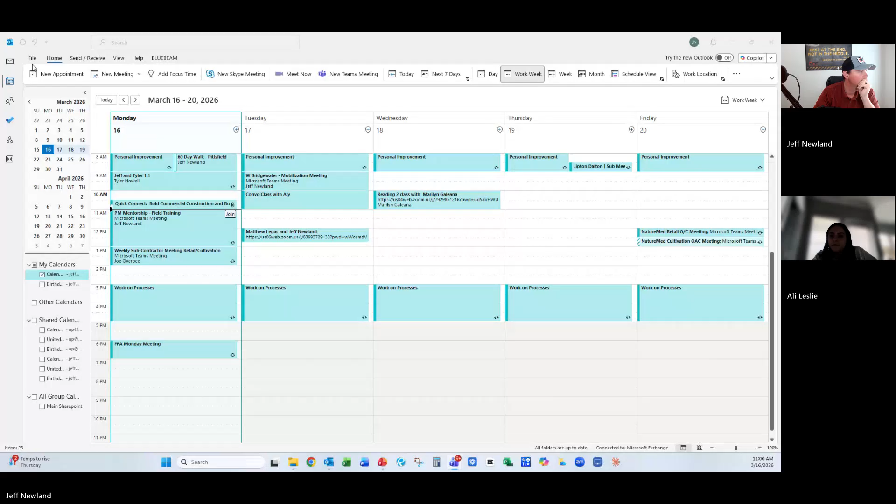Very chill. I'm starting to pack, so trying to take it one thing at a time. I got my first box done yesterday and I was like, okay, here we go. Beautiful. That's exciting. Yeah, I'm excited. Very cool. Very, very cool. Okay, cool.

Well, let's hop right into it. So we're going to build on our earthwork and utility, the civil foundation that we built last week and the week before. We're going to be talking about foundations, which is Division 3 for the CSI codes. We're going to talk about footings, slabs, rebar, anchor bolts, forms, and then testing, budget, all that kind of good stuff.

So, footings, slabs, and rebar cover. Anytime you talk about something being covered, as a definition, if you have 3 inches of cover, that means you've got 3 inches of whatever that is, in most cases concrete, from the outside of it to whatever's on the inside. For instance, think about a rebar cage that's set down in the hole. If the edge of that rebar is 3 inches to the edge of the concrete, then that's called 3 inches of cover, basically.

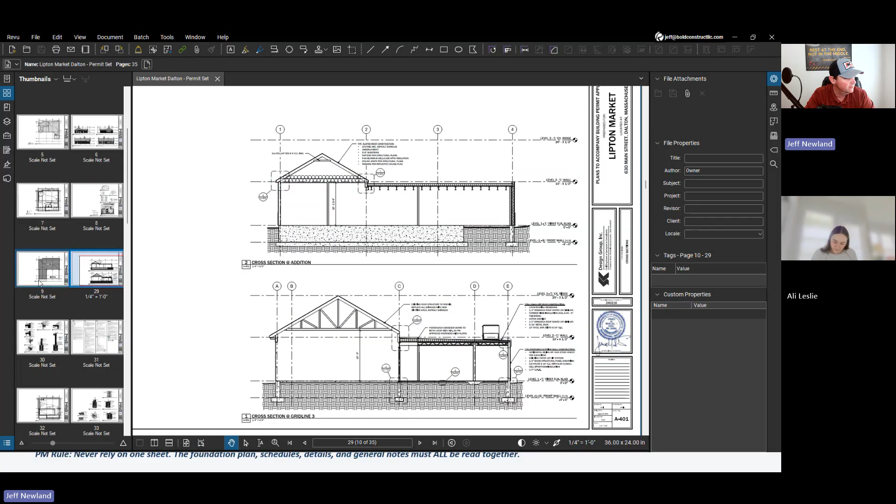So this is a plan view of your foundation. And you can see that it's got several notes called out here. They don't really call out the actual footings like they do on some jobs. These aren't actual, quote unquote, footings per se. This would be a footing right here. But we need to look at the section view to see, so let's just look at that real quick. 402.

Yeah, so actually here is your footing down here. You can see that it's called out as 10 inches and they've got it at -4 foot because that's going to be frost. So this is the bottom of frost wall. You're only going to see this nomenclature in some place that it's cold. You're never going to see this in Texas. Typically, it's never going to say frost wall.

But essentially the contractor could either pour this all at once, which would be called monolithically. So if he poured all of the foundation wall and the footing at the same time, that would be a monolithic pour. If he chose to do it separate, that's fine. You would just have a cold joint.

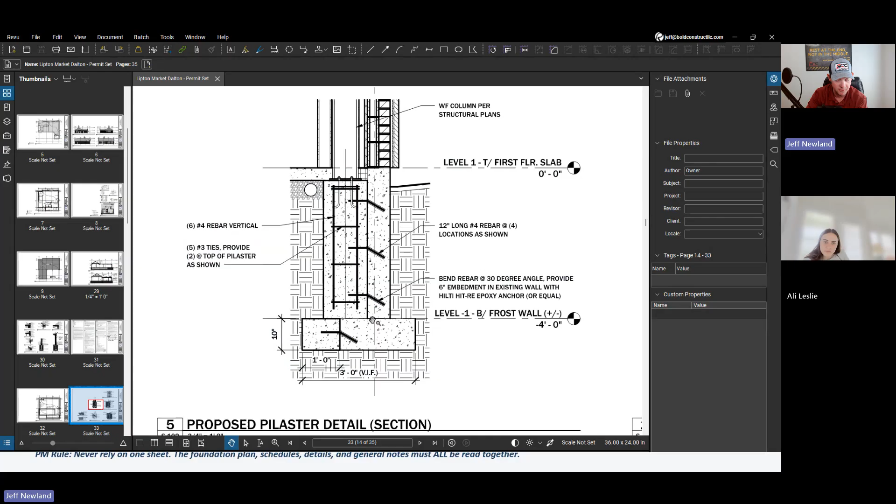So any place that you hear the word cold joint, that means that's two materials that are coming together. In this case, it's concrete and concrete, but the only thing that's joining them together would be, which I don't see it here, but there should be some rebar that would be stuck up.

Now, there will be instructions on some drawings that tell you whether or not you can pour it monolithically, depending on the engineering. Sometimes they don't want it poured together. Other times they do, because their calculations have taken that into account. So that would be a note on the drawings. If you don't see a note, then it's means and methods. It's however the contractor wants to do it.

So I want to find detail 1 on S102. So I'm looking for it to say S-102 right there. There's 2 on S102. There's 4. There's 1. All right. I'm going to say that we've got a typo.

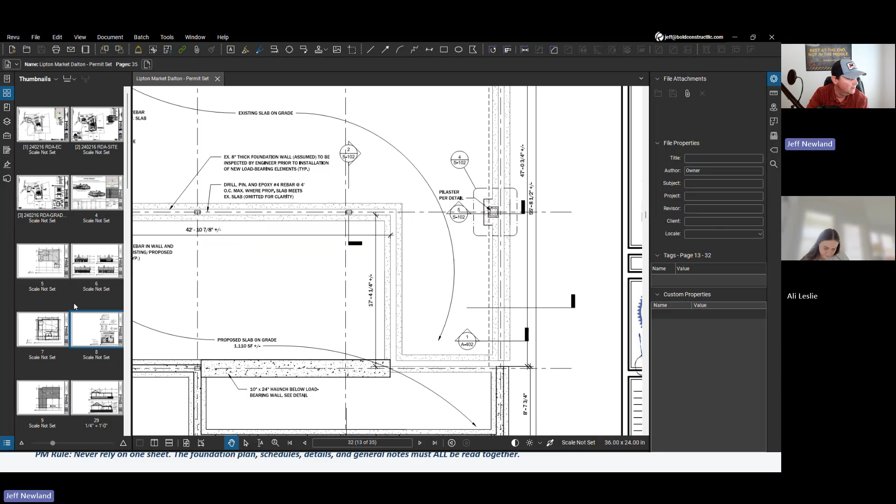And here's why I'm going to say that. So let's look at A402 real quick. And I could be wrong, I'm probably wrong in this case. There's 1 and 2, which could definitely be the detail that they're referring to. But the problem is, they don't give you any details for the foundation.

So let's go back here. Let's look at 2 on S102. So 2 on S102 would be right here. So that is a typical steel column on exterior wall detail. That's what they're trying to tell you there.

So if we go back here, you can see that this cut is through. So this would be a section view. The arrow always tells you how you're looking at it. So you would be looking at it as if you were standing back here looking this direction. Imagine you're down in the hole, you're down in the trench, and you're looking at it from that direction. This is what you would see.

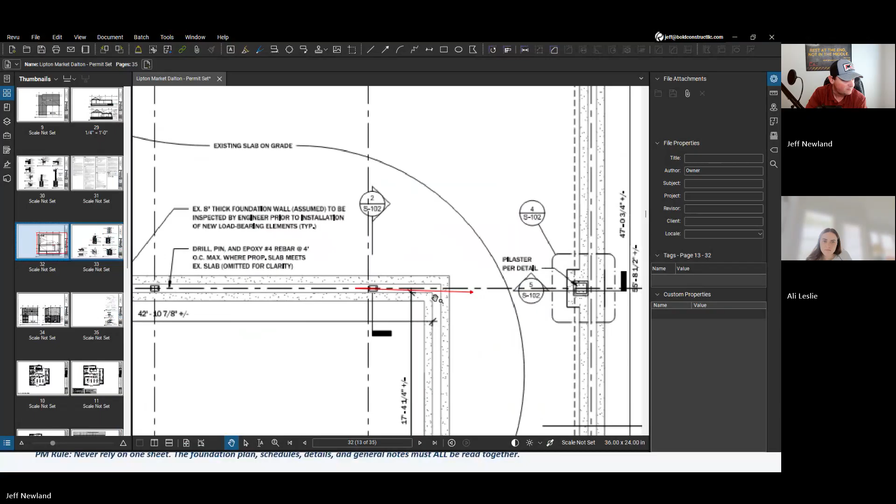So you would see the footing, and it shows to be an existing footing, assumed. Of course, they're assuming that this is actually there. So if we go back, that is actually going to be the exterior wall. This was the existing exterior wall. So if we go down to

see, so this is where we could ask RFIs, because I'm going to assume there's no call out here, but this looks like it's not on a column line. I don't see any columns here. So this is probably our standard detail. We can see the exterior of the building here. It shows the faux stone on the outside. So this is going to be an exterior wall.

So this section view should have a little number and should have an arrow, and I don't see it. Very typical error on the structural drawings. So we can do an RFI on that and verify that it is accurate, just to have it in writing, because we don't ever like to assume anything. But anyway, that's where that would be.

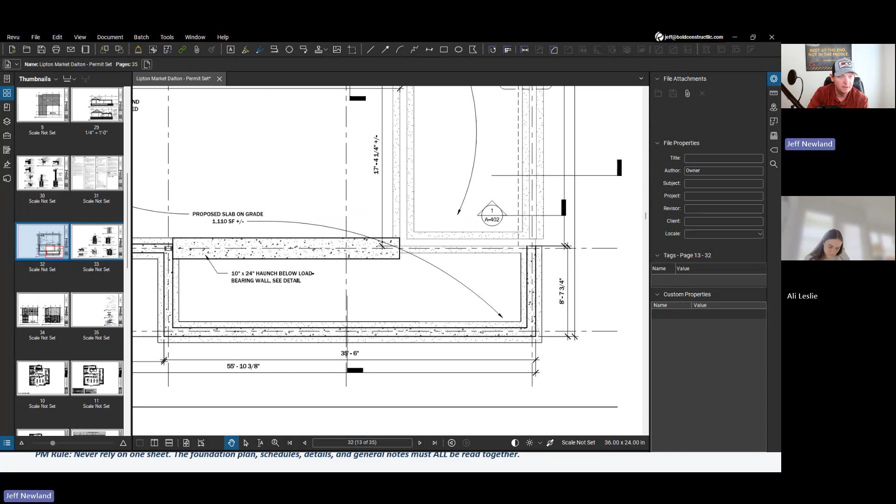So that should say 1 with a line and S-102. And that would tell you, okay, I need to look at page S102, detail 1. And that gives me the same section view. Okay. Let's see here. So footing schedule, pier column schedule, rebar reinforcing schedule. We'll hop into all that, and I'll show you details on what that looks like.

On this set of drawings for Dalton, we don't have any schedules that I can tell. Everything is basically called out, so it calls out number 4 rebar horizontal at 4-foot centers. So that rebar is going to be number 4, which, if you Google it, should be 1/2-inch rebar. One way that I think about it is, if it's number 5, you always put it over 8. They're done in eighths. So if it's called to be number 4, that's going to be 4/8, as far as the diameter of the rebar.

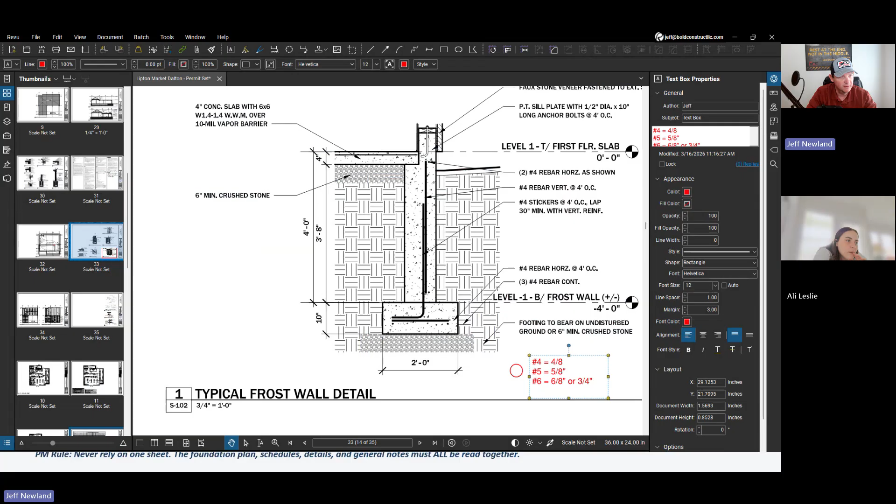Which would be 1/2-inch, right? 4/8. So if it's number 4, that equals 4/8. Then number 5 would equal 5/8. Number 6 would equal 6/8 or 3/4. And let me make sure I am thinking about that right. Yes, you are. Okay, good. And you can always Google it.

These are the standards. They always give you a weight. Rebar is sold by the weight. Not that you'll need to know that, but when it's sold in big quantities, it's sold by the weight, however much tonnage you have. But in any event, that gives you the nominal.

The reason that's important is that when you look at rebar shop drawings, you need to know what a number 5 is, because sometimes it'll be called out as number 5, and sometimes it'll be called out as 5/8. Just kind of depends.

But you would actually have it in the schedules that we're going to look at. Anytime you see the word schedule, it means table. And it's just a legend, right? It's a table that tells you what things are. And you would see in there that it would call out the actual rebar size that was supposed to be used in that particular footing.

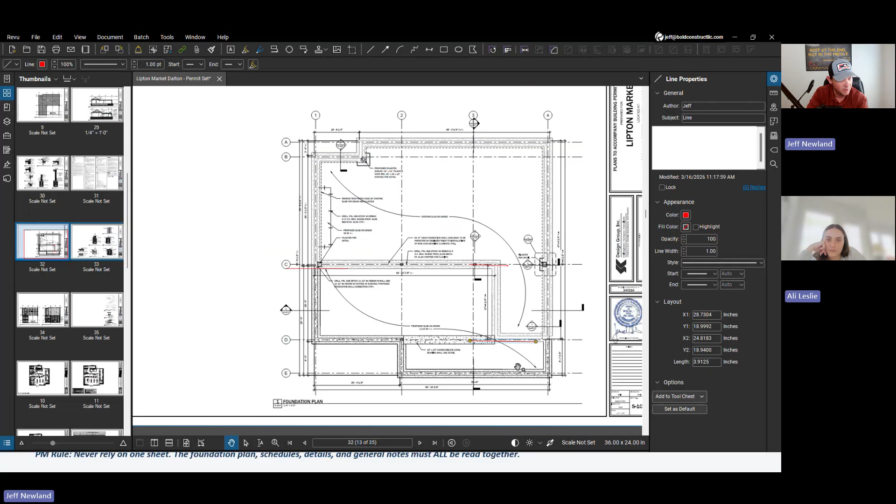Okay. Since this is a smaller build and we're not really doing that much of the foundation, because all of this is assumed to be existing, the only stuff we're adding is really from here back. So from basically this line, from right in there to right in here, is what we're adding. That's the only foundation we're adding. So they didn't go to the trouble of making any kind of schedule.

Okay. So when I was looking through the plans, there are schedules in these plans, but for architectural stuff, not for the foundation. Correct. So you'll have an equipment schedule. You'll probably have a finish schedule somewhere. Yeah, floor finish schedule. You should have a room finish schedule. All of those schedules, and typically they're all done the same. So it would call out whatever the floor finish is, whatever they're using.

So F1, F2, F3. That would be floor finish 1, floor finish 2, floor finish 3, and then actually what they are. But you should be able to look at any set of plans, go to the architecturals, look for a room finish schedule. It should tell you the room number, the description of the room. It should tell you how it's finished on one wall, how it's finished on the ceiling. That's why they call it a room finish schedule.

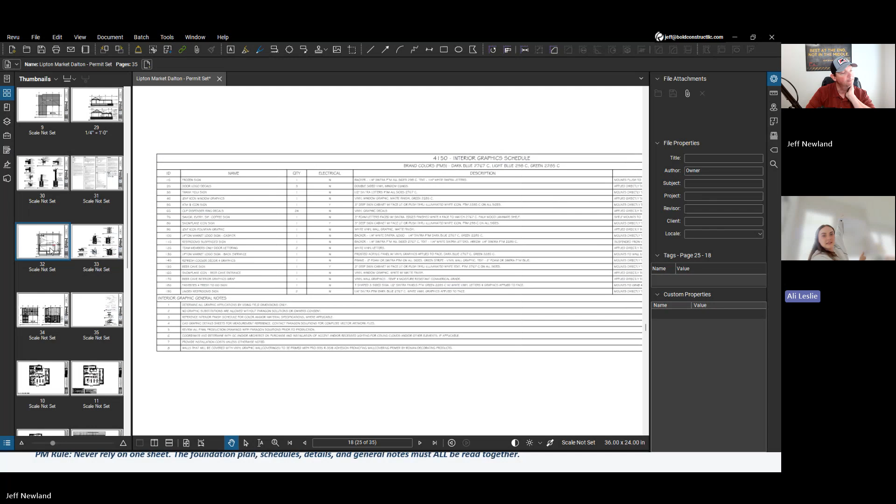Okay. And now this isn't technically in regards to foundation or concrete, but on the schedule for Lipton Market, there was a section on one of the schedules. It kept saying verify on a few line items, and so, not the graphics, but I think it was that one, is that when you would have a submittal? Yes. Okay. So all of these verifies on here are to be used. You're going to see the word verify a ton on any set of drawings. Basically, if the architects and engineers don't know, then it's on the contractor to verify.

Okay. So this is where we would get, which we have for this one, because I actually have sent all the equipment cut sheets. I put together a package, and we actually sent that, because we're not providing the equipment here. So I sent that to the electrician so that he would know what he's supposed to be running. So then he would look at it and say, okay, the freezing condenser, I've got a cut sheet for that. And so he would make notation of what the volts are, what the amperage is, and what the phase is.

Now that's important because when they go to pull wire, if they pull the wrong size wire, they're going to have to pull it again. And there may not be room in the conduit. That's why it's hyper important, super, super important. When we have a kitchen, when we have any equipment that the owner's providing, that we get those cut sheets and we make sure we get them to the electrician and have him verify. As the first verification, we have him verify, because he's the one that's actually doing the work, that the electrical drawings actually match the equipment that he's going to be putting in.

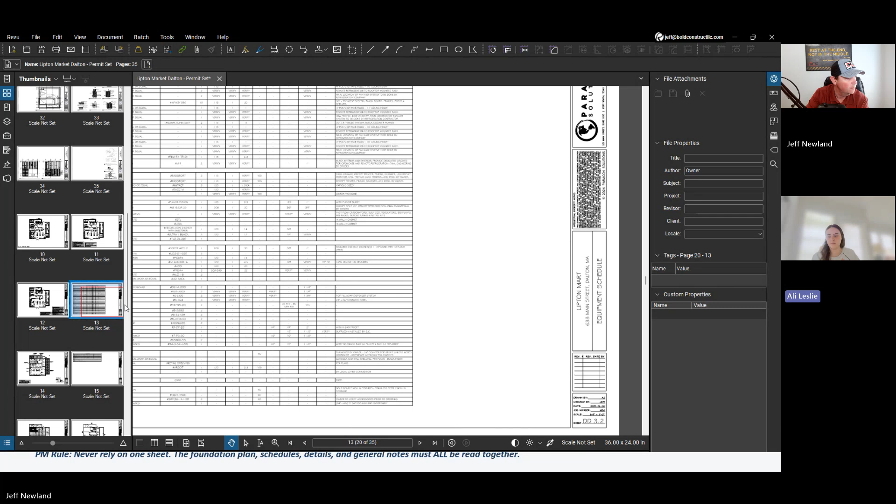Okay. I had gone through and highlighted all the verify ones, and I mean, there were a lot. And then I looked on the submittal tab in Procore, and there are some that are missing, which I can just send in an email, or we can talk about it another time. But anyways, when we had met about Lipton, you had said to look at the plans and see what I felt needed to be a submittal. So I just made notes of some things, but I wanted to make sure that a schedule is one of the places you would find items that would go into a submittal. Yes, that's correct. Yep. You're absolutely right.

And yeah, some of these we're not going to have. Obviously anything that doesn't require any kind of power, we're not going to have a cut sheet for. So any of these items we're not going to have, but we should have at least some of these, like the under counter sink, the faucets, the soap, because those are the ones that are being provided by the owner.

The ones you're not going to see on the schedule pertaining to plumbing are going to be like your restroom, your faucet, your sink in the restroom, because they're not doing that. So yeah, just something to keep in mind. But yes, it's very hit or miss. Every project's different. It just kind of depends, that's what makes our job so hard sometimes.

Okay, perfect. So we'll talk more about schedules. We'll get into those. I have some examples of that. Sections and cuts. We talked about sections, and how that needs to be looked at. If you've got a plan view, you should always have a section view that you're able to look at a cut on a wall, on a foundation, on whatever, because that provides almost all the detail that you need in order to build it.

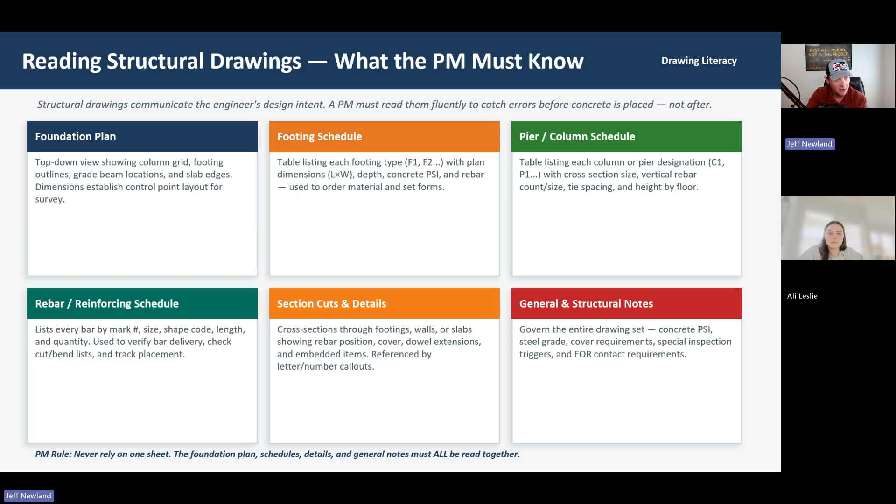So just keep that in mind. More and more on these smaller jobs, they're not calling out the PSI on the concrete. So we always assume that it's 3,000 or 3,500. There's not a whole lot of price difference in those, maybe $5 a yard, something like that. So not a huge deal. We just need to make sure that we get it right.

So you've got different types of footings. When you talk about a slab, that's not a foundation. Those are two different things, slab and foundation. So this is a great example here. Everything from the bottom of the slab down is your foundation, which is going to consist of your footing. It may consist of a foundation wall. It may consist of a pier. But just remember, anything below the slab is your foundation.

Anything from the bottom of the slab up is just your slab, which is going to have either wire mesh or rebar in that top, usually 4 to 6 inches. Okay. So this is all slab right here. Like I said, everything below that is going to be foundation, foundation, foundation.

And then they backfilled here. This is pretty common with what you would see in one of our car washes. We've got a foundation, we've got a foundation wall. They're going to backfill with either stone or gravel, and that way they'll be able to get it to the exact elevation that they need. And then the slab is your top 4 to 6 inches. So just for definition purposes, there is a difference between slab and foundation.

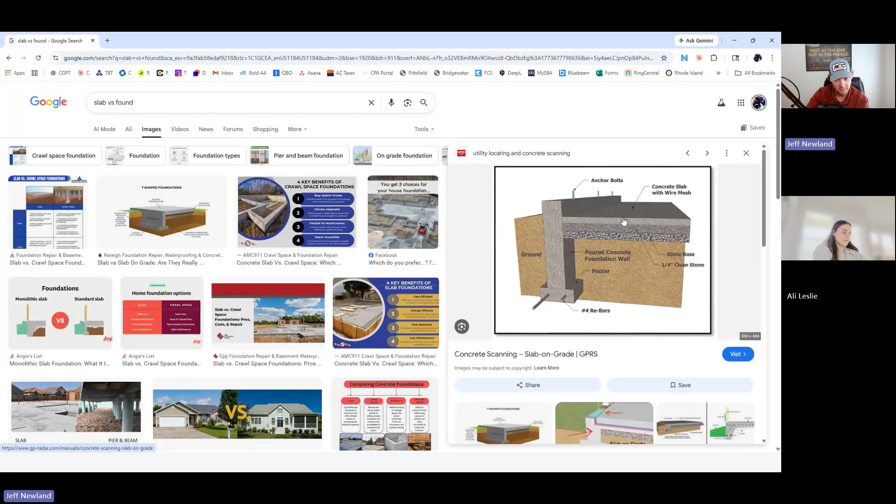Strip footing. Let me pull up a drawing, it'd be easier to see. So a strip footing is like another word for your foundation wall, as we relate it to the car washes. Basically, it's that wall that is in between. It's above the footing, but it's the smaller wall that is between the two footings.

This would be a foundation wall. Again, they don't really call them strip footings, and the reason they don't is because we don't want to confuse these footings here for your columns. So you've got column footings, foundation walls, and grade beams are the three that we talk about all the time.

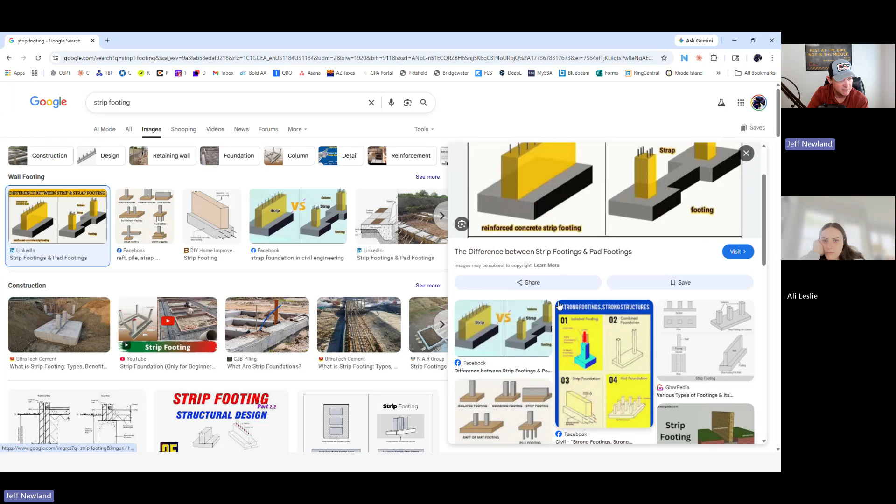So mat foundation we don't use on our projects. A mat foundation is basically a huge slab. I think one of the videos probably covered it, but they use it in high rises and taller, bigger buildings, where instead of having a bunch of different footings, they just pour one big footing over the whole thing. But like I said, we don't really get into those at all because our buildings aren't big enough.

Slab on grade is your slab. SOG is always slab on grade. They call it a slab, which is your finished floor. Whenever they talk about finished floor, your finished floor elevation would be the top of your slab, or your slab on grade. Again, it's the top 4 to 6 inches that's above your foundation, and it's always big and flat. So, okay.

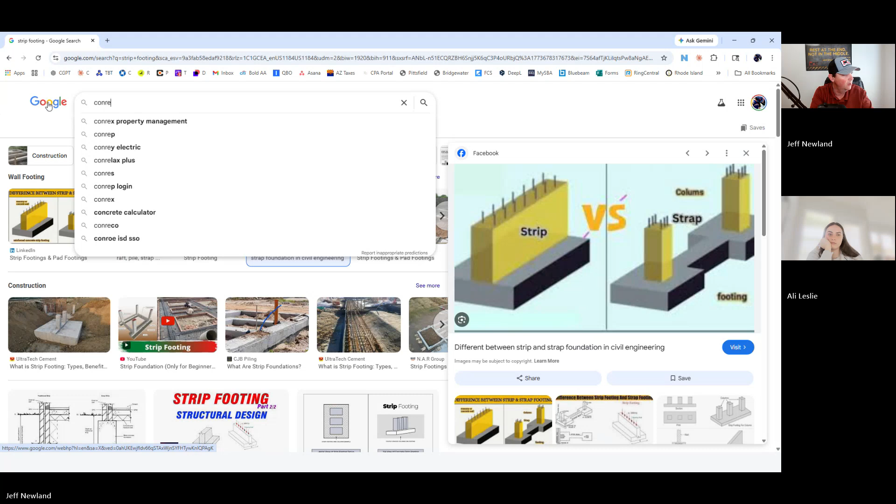This is talking about rebar cover. So this is what we talked about a while ago, and these are general guidelines, right? Everything could be different, but you should always have at least a minimum of 3 inches of cover between your rebar and the ground. This particular one is talking about chairs. Let's look. It's not a very good picture. No, we don't use those. There we go. The ones that you're going to see a lot are going to be the plastic ones. So when they talk about 3 inches of cover, it's 3 inches from the ground to that rebar, where the chair is.

This is a very common one right here. And then you will also see these, and all of these do the same thing. They're not near as common, but you would also see what look like little bricks. There we go, this is a good one right here. You'll see that a lot as a rebar support. Basically, it does the same thing. All it's doing is keeping that rebar off the ground.

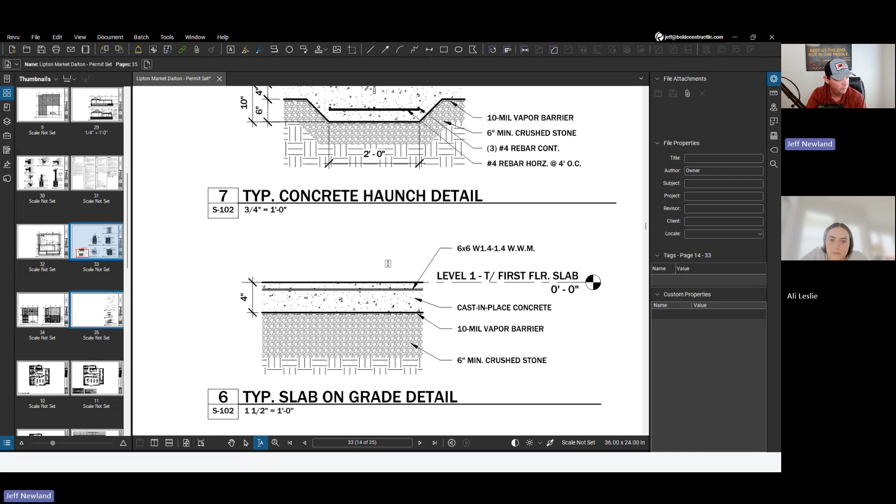And then you also want to make sure that, so every slab has a vapor barrier, and it means exactly that. This keeps moisture out of the slab. So it's a piece of plastic, right? And then of course they've got their 6-inch crushed stone. We're getting a little off subject, but it's important that we talk about the vapor barrier, because in your concrete submittals, you should have the wire and you should have the vapor barrier.

The 1.4, I ChatGPT'd it. It's the wire size in both directions. Oh, okay. Well, that makes sense. So it's not in inches. That's got to be in millimeters, I would think. I don't know what else it would be in.

So this is vapor barrier with rebar. Let's see if we can find a vapor barrier with welded wire, to see if we can find an exact example. That looks like welded wire. So this is what your slab should look like. That's exactly what they're doing. So the reason they have it elevated like this is because they're planning on putting a 3-inch chair underneath that. So that's why it's in the top third of the slab. But they're laying their vapor barrier down.

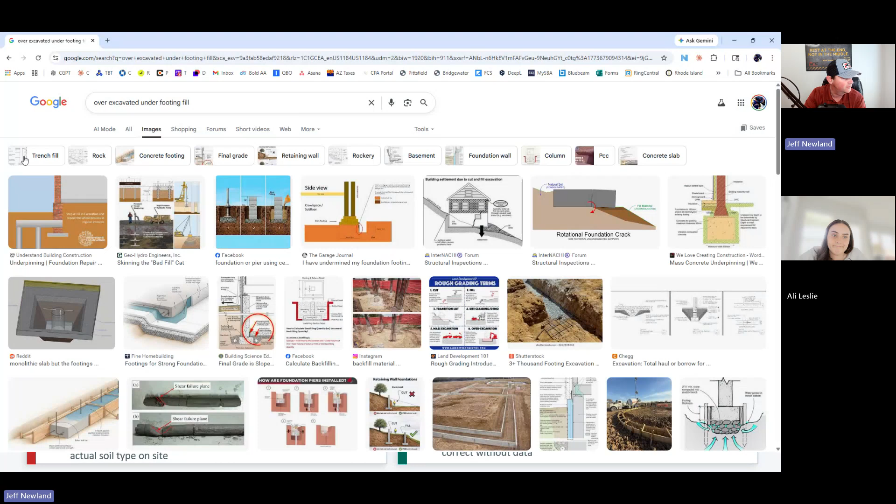So, okay. But what it's talking about, let me see if I can find a decent representation here of what it's talking about. So sometimes you'll have a... don't really see it. Some of these pictures are not exactly the highest of quality here. Basically what I'm looking for is where you've poured a foundation, you've poured a footing, and I guess we could use this for lack of a better term.

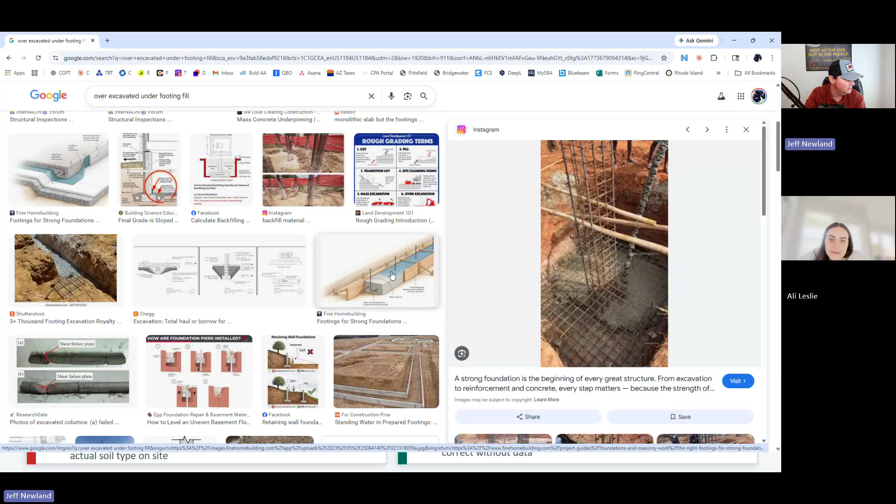So let's say that, in Texas, so you'll see this in the Northeast, they'll over excavate and they'll actually do their forms for their foundations. You won't hardly see this in Texas at all, ever. Unless the structural engineer has purposely called it out and says that all foundations shall be formed and not earth formed. That's typically a huge note if you're in Texas, because it's not the way things are normally done.

Think about it like concrete without the rock in it, without aggregate. It's like a foam material, except it's not foam. It's a different material, but that's why they call it flowable fill. It will go into the cracks, into the crevices, and will support this. Basically, it acts like the dirt that had washed out from underneath it.

So that is something that is 100% preventable. That's not something that sneaks up on us. If we need to backfill, we need to get it done at least to the top of the footing. That way it protects the earth that's on the bottom of the footing.

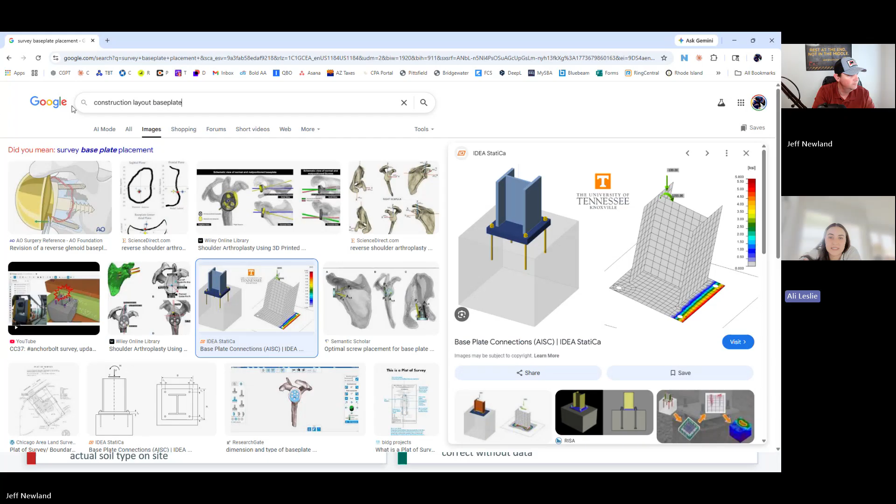And now, would this be something that the superintendent would do, or would you get a survey company to come out there? No, we always get a survey company unless, like in West Bridgewater, Nick has our total station. So he will actually take it and do what the surveyor would do. But essentially you're going around.

Now, not all of our base plates are going to be marked like this, but that gives you a good representation of what we're going to be shooting for. So they would go around and survey. They would put their machine right here, their grade rod right here, and survey to make sure it's in the right place. Okay. And some places require you to have a form survey. Actually, the municipalities will require that.

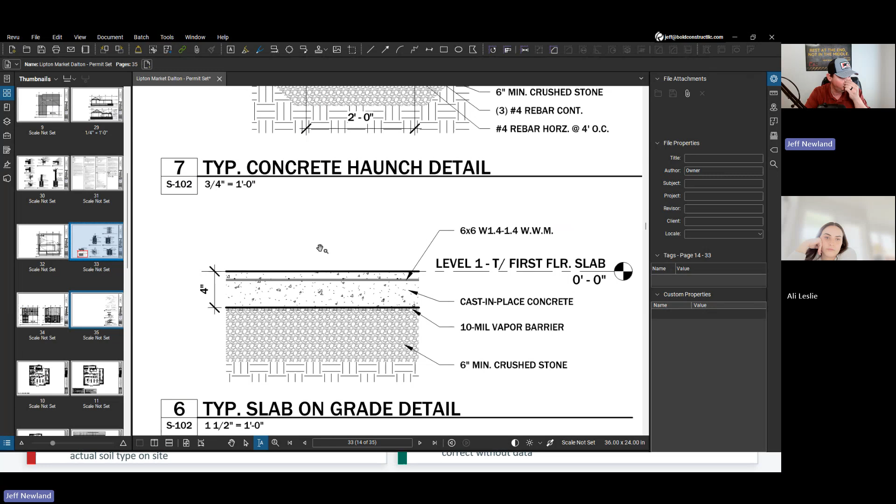So like on our car washes, they're going to take that column layout drawing that we got, and they're going to compare that to exactly what we have in the field. So if we go to our structural drawings real quick for West Bridgewater. Oh, well, hang on. We're making a mess here. Let's close this out. Don't save it.

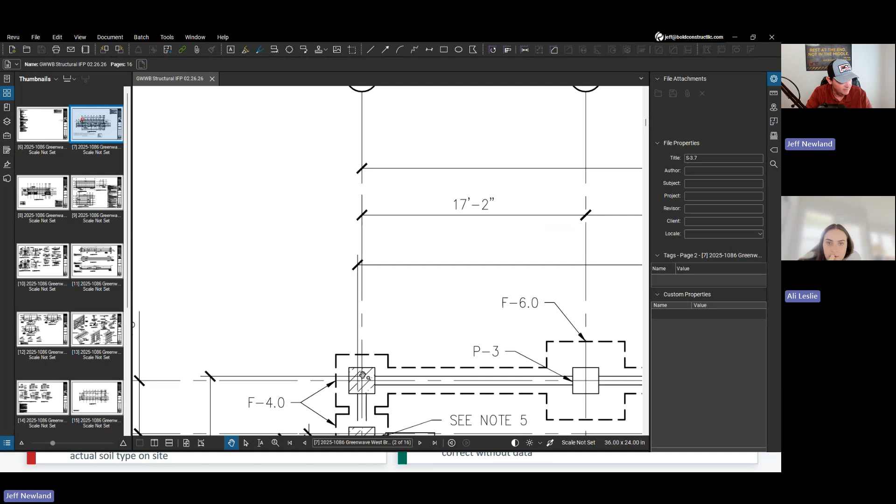But the thing you have to pay attention to very closely, and they have to pay attention to this in the field, because if somebody's not watching, they're going to look at this drawing. Think about this. Say you got 4 guys in a hole out there trying to form this with a bunch of paper drawings, right? And they're looking at this and they don't see that this is not lined up on the center of the column. We have done this before.

So that's why the base plate survey is so important, because the center of this base plate is right here. Well, that didn't help.

It's right there. Okay. But if they're looking at this in the field, they may look and say, okay, well, from center of base plate to center of base plate, I need to be 120 foot. So that's what they start laying out. Well, if you look, 120 foot takes you all the way to right here, not right here, which is the center of this base plate. See the difference?

Yeah. So all of a sudden now, if they lay that out wrong, then we've added, we'll just call this 4 inches. Maybe this is 4 inches here, and then over here is another 4 inches. So now all of a sudden our structure is not going to fit together. It's going to be 4 inches off in both directions.

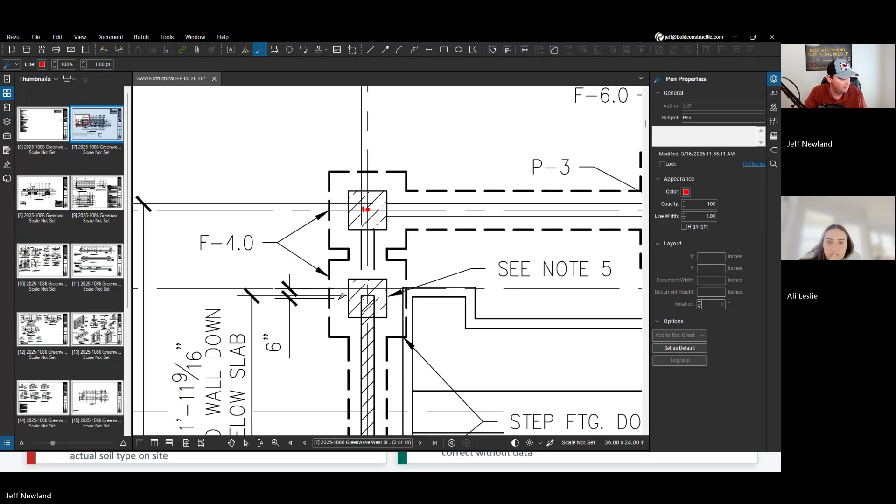So that's why, and here's another example of this. This column line doesn't line up with the center of this column. Now, isn't that confusing as hell, right? Yeah. So the center of this base plate is actually somewhere in this neighborhood. I actually couldn't really tell you where that is right now without CAD. So that's why it's so super critical to get it all surveyed before we pour.

Okay. The worst thing a superintendent can do is pull a James Gray and survey it after everything's poured. Oh, I didn't know he did that. He wasn't coming to mind, but I think it was our friend in Danville before the guy that ended up finishing it, Jonathan.

Yeah. I think maybe on meetings you had said, well, have the surveyors gone out? Have you kind of looked at it yourself? And he was like, oh no, I haven't, I'll do that today. Then the next week, have you actually done it? No, I haven't yet, I'll get it done. And so I just remember hearing how important it was, even if there's time before the surveyor can get there, at least making sure on your end. I think he had something on site that was useful and he was not using it.

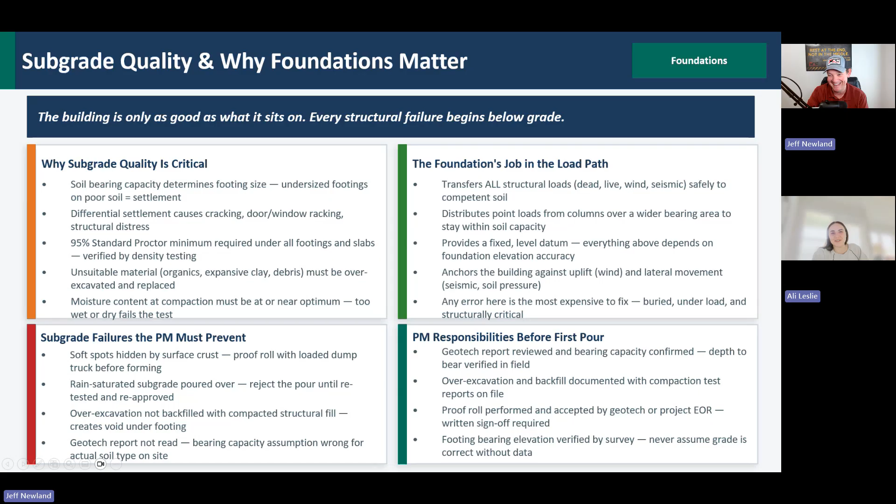For those of you listening, that's the quickest way to get fired from a job too, by the way. So yeah, we have lots of stories to tell. Oh goodness. All right.

Well, I know that my top elevation is also my finished floor. All right, my FFE. It's not FF&E, it's FFE, because FF&E is something completely different, dealing with architectural stuff. So finished floor elevation.

So I know that footing number one, F1, is 2 foot from the top. So if my finished floor should be 100, right? It's always 100. Your finished floor is always 100. Then I know that the top of this footing is going to be 98. Something super simple that the superintendent can verify.

This particular one also gives you the PSI, and then it gives you the rebar mats. So this is the different. So they want 4 number 5s at 9 inches on center. So that's going to be... let's go to rebar mat 4 number 5 at 9 inches on center.

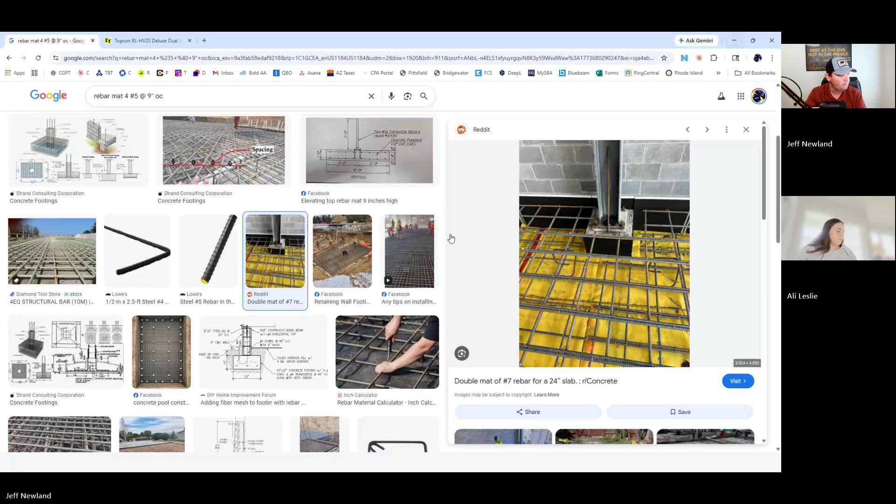So let's just say that these were single pieces of rebar. So it's number 5s, 1, 2, 3, 4, and then the opposite direction too. It would be 9 inches on center. So it makes a grid is all it does. That's all it's doing. And that would be the same thing as what it's telling you.

Let's see, this gives you a dowel. Let me look here. Number 6, number 4, a continued bond beam. This is actually for, here we go. 3 number 4 continuous, and number 4 transverse at 48 inches on center. So that's a fancy way of saying, think about that as like a rebar mat. I need to Google. I haven't heard the word transverse in quite some time. So number 3, and I think that just means the opposite direction is all that means. Again, sometimes they make it more complicated than what it really needs to be.

But you should have a footing schedule on most of your drawings. If we go back to this structural set, because these should be the most common of what we're looking at. And I've actually got an example that I put in here later. But here on the main foundation plan, you can see it's a much narrowed down version, doesn't give you a whole lot of information other than the footing number, the size of the footing, and the actual rebar. So this is number 5 bars at 6 inches on center. EW is each way. So that's like that.

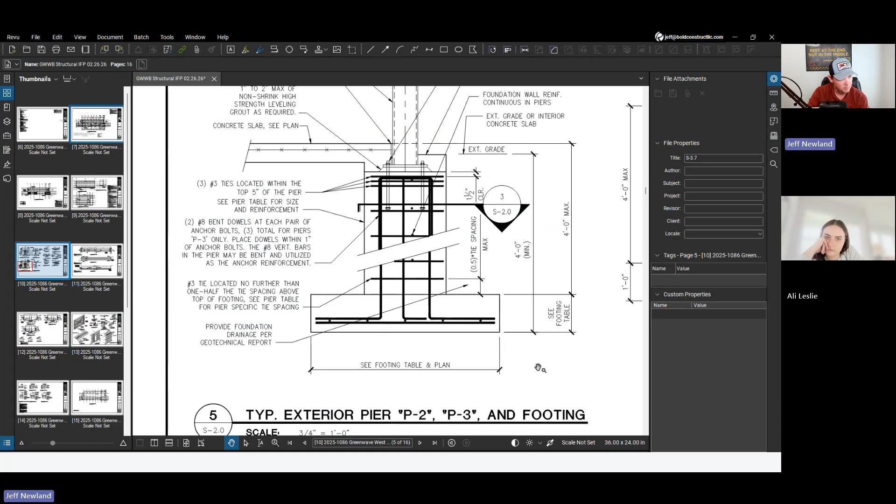And at the bottom. So depending on how tall that footing is, this one's only 1 foot, you would look at the actual section view to see what it actually looks like. So here's our footing right here. And this is why they do the schedules or the tables, because they're just going to put a note here that says see footing table. That's it. So now you got to look and say, okay, this is a typical for P2 and P3, which is your pier cap, which is different than your footing. So P2 and P3 is what they're talking about right here.

But in this particular case, there's only one rebar mat. It's not top and bottom, according to what I'm seeing here. So I see the J bolts that are here, which is rebar. I see the rebar that's in an L here. And then it's tied to the rebar mat that's going to be wherever it is located per the footing table.

All right, so a lot of information here, but the good thing is that a lot of this is kind of regurgitated on several of these details. So here's going to be a lot of the same information. You'll just need to be sure to read through it and make sure that it makes sense. And if something doesn't make sense, then obviously we Google it or we ask a question, but all of this has been determined because of that geotech report and the size of the building. That's the structural engineer's job.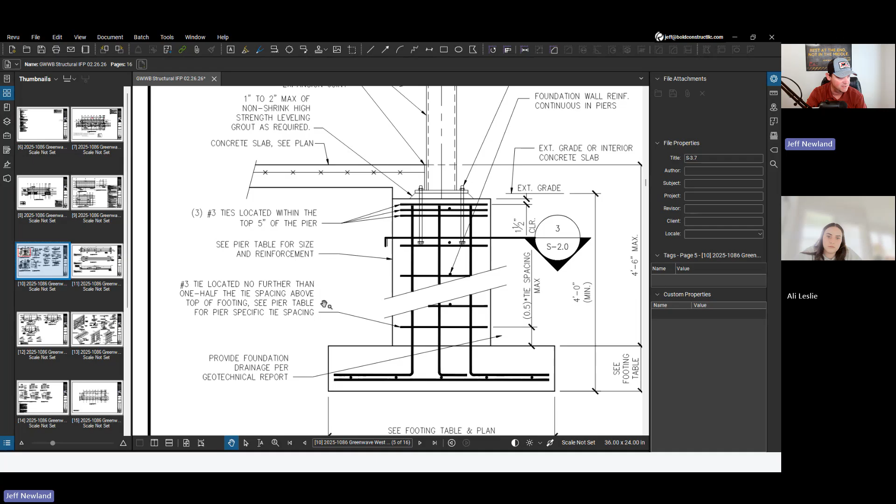So you can see that this one's a little different. They want extra reinforcement at the top of the pier, and then they have standard reinforcement all the way down through. So number 3, tie located no further than 1/2 the tie spacing above the top of the footing. See the pier table.

So let's see, no further than 1/2 the tie spacing above the top of the footing, see pier table. So if it tells you to space this in 12 inches, then this would be 6 inches for the bottom one. Does that make sense? Mm-hmm. Because it's no further than 1/2 the tie spacing.

So on the pier cap table, it would tell you that these are to be spaced, call it 1 foot apart. Then this one right here, because it's closer to the bottom, is going to be no further than 6 inches because it's no more than half of whatever that spacing is. So a little confusing, but it'll make a lot more sense once you start digging into it and seeing exactly what you're looking at.

When you get a set of rebar shop drawings, they're not going to look like this necessarily. The company that's providing the rebar is going to take all of these pieces. So this is called a 90. They're going to show one of these and give a quantity on it. Then, see, this one doesn't have as long of a leg, so that's another one they're going to show. They're going to show each one with the quantity and how long they are, and that's how they would construct this together.

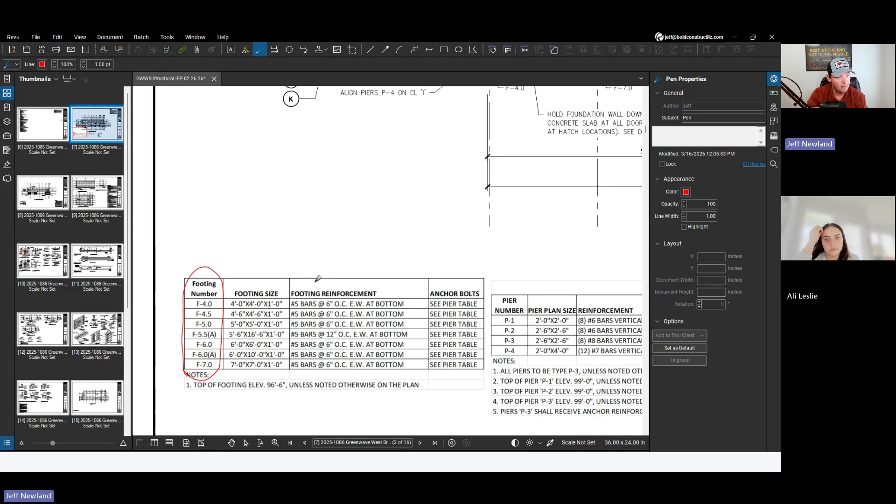Okay. And then as the PM, you would need to confirm the quantities, right? Yes, so that's where I would use AI to help me. If you try to do it with paper and pen, it's good to do it one time, but it's going to be very time consuming because you have all of these different footings to verify. So I would put this into AI and say, give me a detailed breakdown of the rebar shown for this footing. How many of these should I have? How many of these should I have?

And then you can take that and compare it. Or once it's done that, upload the shop drawings and say, now compare it to the shop drawing submittal that I've got. Okay. And let it work its magic. Once it spits it out, you compare it and say, okay, it originally said we were supposed to have these.

And of course I would go and spot check, right? Maybe the 5 and the 6, to make sure it actually did the original count correctly, and then you can compare it to the submittal drawings once it spits out the data. So that's something you can use AI for. It's going to help tremendously on all of this.

But you can see here reading this, your F4s are there. There's an F4.5, an F5, F7, F4. So I would need to dig into the drawings a little bit more to see what it's talking about here, because I've got this one pointing to here and this one pointing to here. So I would need to do some more digging to figure that out.

But that's not to be confused with the P's, right? This is the P4, which is going to be your pier table. Okay. And the difference between those two is right here. This is footing right here. This is pier right here. That's your pier cap. Okay. Very important, because pier means something completely different.

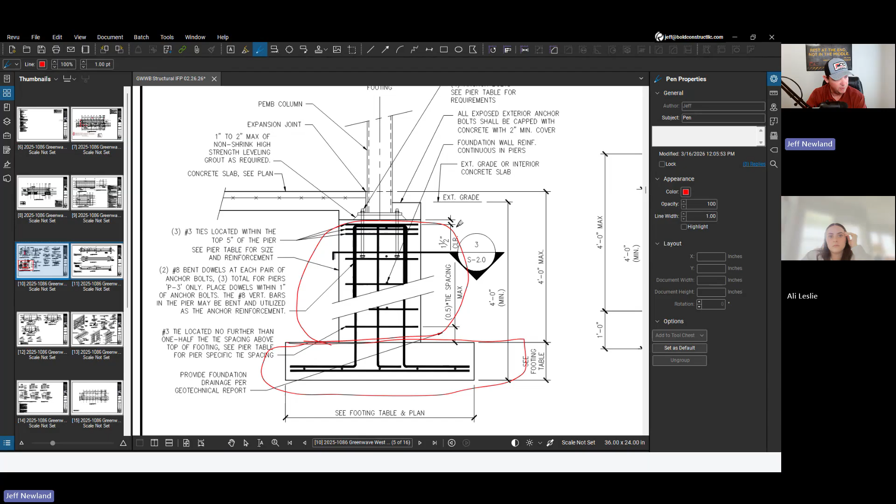So in concrete foundations, you've got footings as your very bottom layer. That's the first thing. That's what's in contact with the earth. Then you've got piers. Sometimes instead of doing a spread footing, which is what this is. A spread footing is basically 4x4, 5x5, whatever, 4.5x6. That's called a spread footing.

It spreads the load. Sometimes it doesn't make sense to do these, and it's cheaper to actually drill a pier. You would drill a pier that was really deep and would have a rebar cage in it. You wouldn't have a footing, but this would be, say, a 3-foot pier. Think about it like light pole bases. We drill piers to do our light pole bases. It's a circle, is the best way to think about it.

Most of the time, in the projects we do, you will not have square piers. So when you hear the word pier, it's always a diameter. It's either 2 foot, 3 foot, 4 foot, whatever diameter, where they auger down. Then they may put a sonotube in if the soil is not compact enough, because you're typically doing these in native soils. You're not doing them in something that's been structurally filled or anything else. Okay.

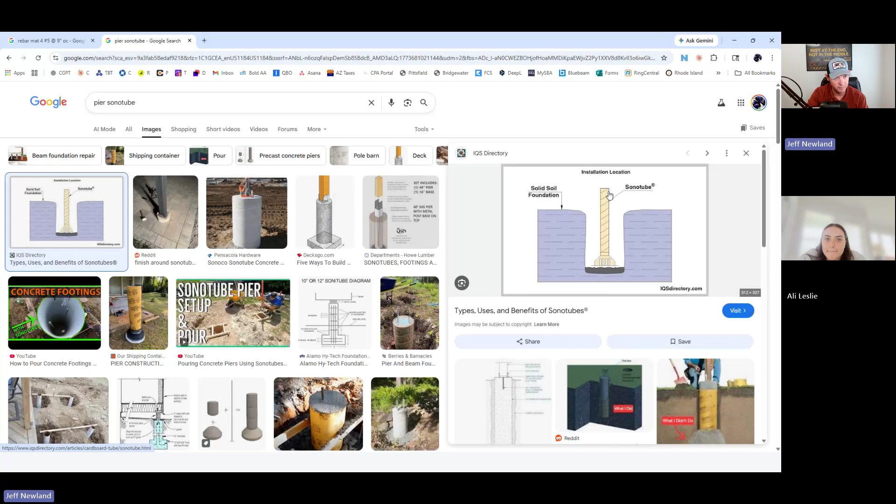Not to get too detailed, but this would be called a bell. It's called a bell on the bottom of the pier, which goes back to uplift. It helps keep that pier from pulling out of the ground when you have this little bell on the bottom of it. But sometimes you have to put the sonotube in place, and all that sonotube is there for is to hold the concrete. Hold the concrete, hold the anchor bolts if you've got them in there, and that way it doesn't move on you.

So we do most of our stuff as smaller buildings, and with smaller buildings it's not cost effective to do piers because you have to have many more of them, and it's more cost effective to do the spread footings. So that's why on the buildings we typically do, you'll see these details showing the spread footings way more than you will actually piers in the ground.

All right. Does that make sense? I don't want to confuse you there. It does. Well, in one of the videos you sent, it showed the Burj Khalifa and all of the rebar, and it talked about what would happen if it was not, if you just kind of let it sit there, it would fall over and crash. So seeing that and basing it off of that video, it's making sense. Okay, perfect. Good.

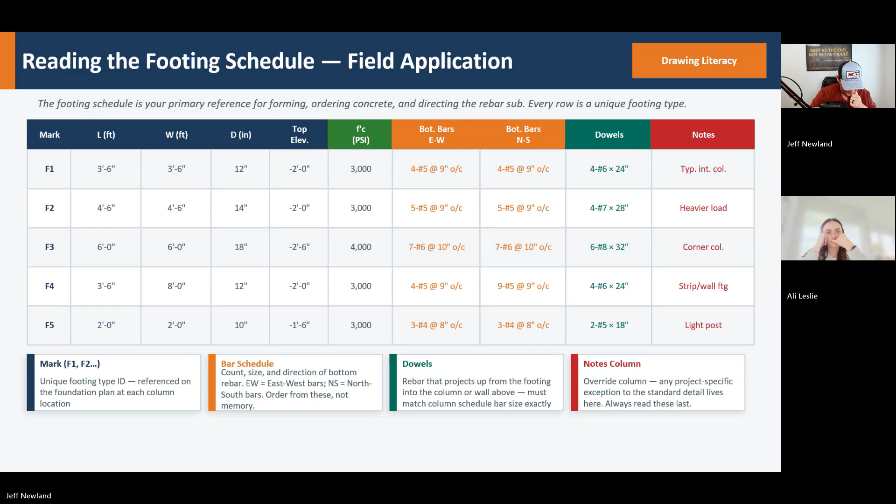All right, so then we'll go through. We're not going to go through examples on all this because these are pretty good layouts here. Now, I will say that this is a lot more information than they typically give you. This would be like an ideal situation because it looks like all the information you need is actually here. But anytime there's a question on anything, you can always refer to, this happens to be a footing schedule and column schedule, and it will give you exactly what should be in the ground. Okay.

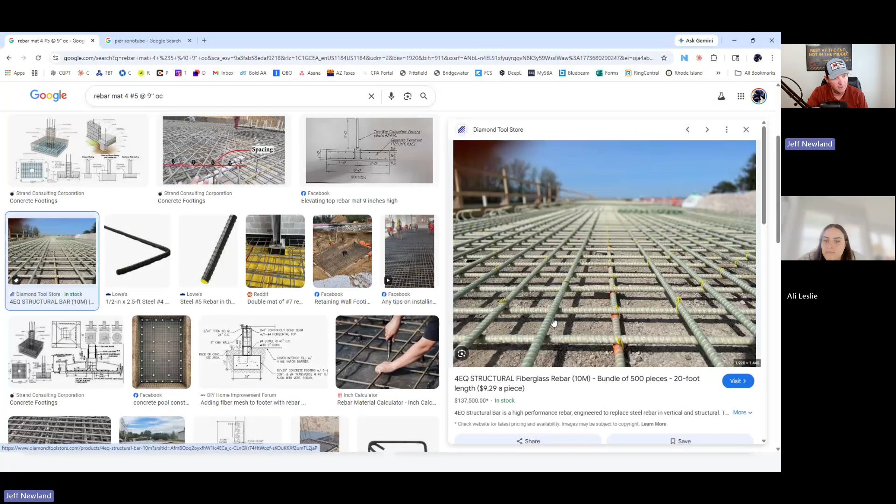Or sometimes you have a rebar mat, which is in your slab on grade, right? Rebar comes in 20 or 40-foot lengths if you want it, but most of the time we see it in 20. So if you want to see, these are spliced together. These are not spliced, these are just the mats. But if you had two of these come together, you would have an overlap. I don't see one there. Let me look here. I'm sure there's one here, I just can't see it.

But anywhere you would be splicing two pieces of rebar together, the distance that they overlap each other would be called the lap. And it's specified. It's usually 18 inches, 2 foot, something like that, but it will be specified on the drawings what the lap should be. And then of course, photos, that's a given. Your superintendent ought to be taking photos of absolutely everything.

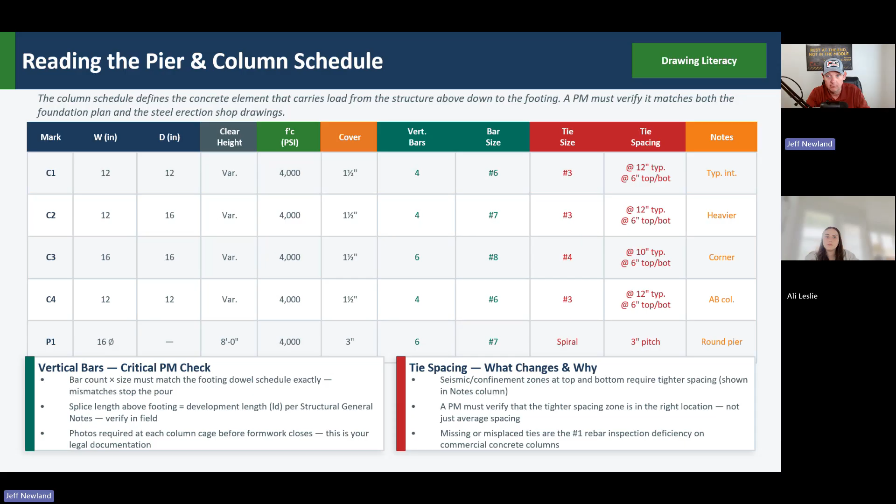An L is exactly that, an L. An L you automatically know is like from a footing to a foundation wall, or it's moving from one piece of concrete to the next. That's what an L is for. And then they give you the total length. That's what you need to remember here: this is actually part of your shop drawings that you would upload to AI and use to verify.

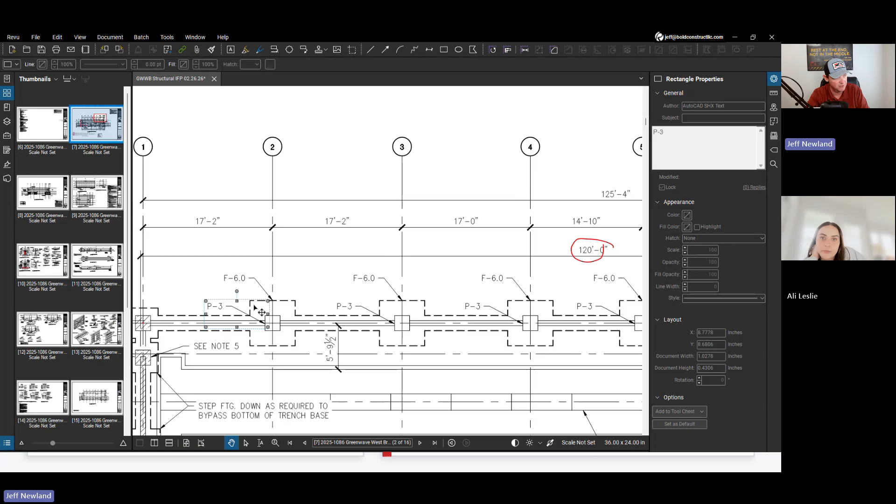Where something will compound, let's go back to here. Back to our example where the center is off. If they put this pier in the wrong place and use it to measure everything else, all of these may be correct from pier to pier, but by the time you get to the end, you're going to be wrong because you didn't start at the correct center point. If you started there instead of actually starting there to lay out, your entire layout's going to be wrong, the whole thing.

For column C3, how many vertical bars do you need and at what size? What dowels must you spec on the footing? Footing order to match? That doesn't really make sense. But in any event, let's look at our column schedule. So we're ordering rebar for column C3. It's 16 by 16. It's got 6 vertical bars. They're number 8s, and our ties are number 4s. And then our tie spacing is every 10 and 6.

So basically the vertical bars that we're going to need are going to be 6, and they're number 8s, which are basically 1 inch. That's going to be some big old rebar. The tie size doesn't go by 8, so it's not going to be a 1/2 inch tie. I'd have to Google what the tie size is, and then your spacing, 10 and 6.

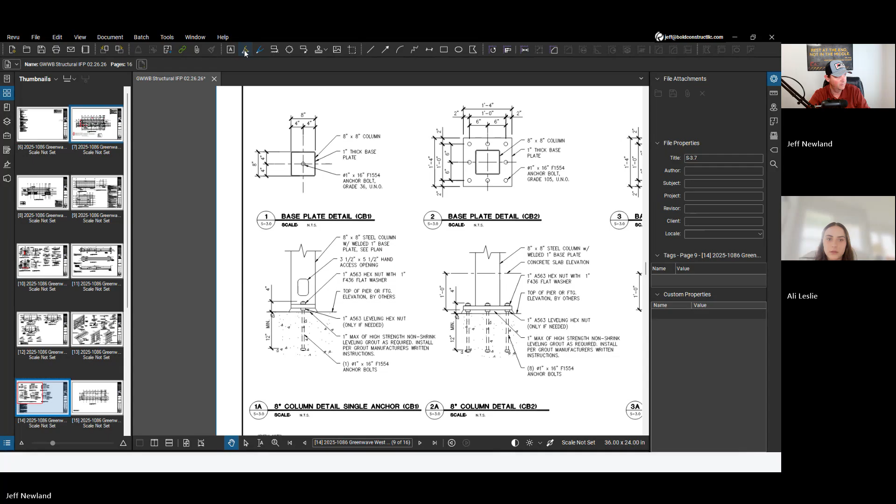So they provide us with all of these, so CB should be like CB1, CB3. See, each one of these are called out different. If you look back at this page here, this tells you what a CB1 is. Okay. Yep, there's CB1, CB2, CB3. It gives you a section view and also gives you a plan view right here.

So you should know that if you're looking at a job, you can automatically go on the job and just kind of look, okay, I already know that all of these along this wall are going to be, well, we got a mixture. So CB1, CB3, here are CB2s, and then we've got CB3 here, a CB3, a CB1, CB1, CB3.

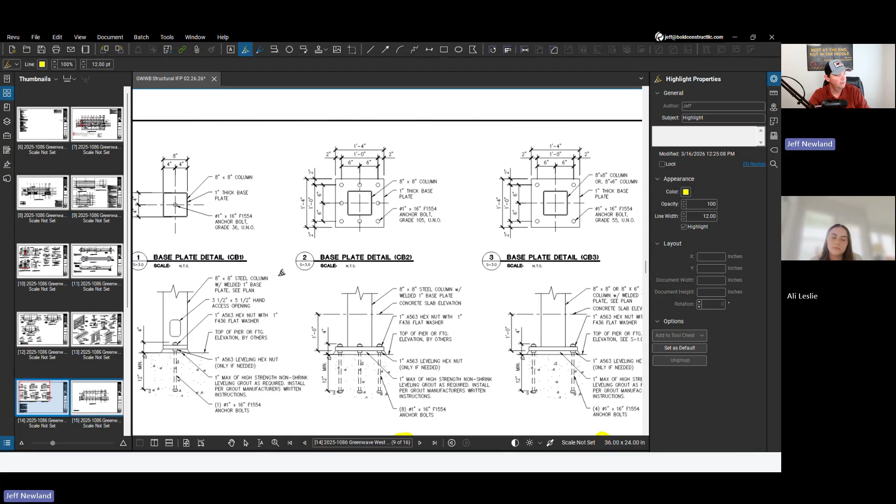So if I walk on the job site, or more importantly, I get a call, right? You get a call from your superintendent that says, hey, we don't have enough CB2s on this job. And you're like, well, how many do you have? Well, I've got however many. And then you're like, okay, well, how many are we supposed to have? Then you can go on here and look them up. And maybe they're assuming that these are CB2s, whatever they're assuming on site.

That way, when the base plates come in and the anchor bolts come in, I know exactly how many anchor bolts I need because I can see here, right? There's one per of these. There are 8 anchor bolts in the CB2s and there are 4 anchor bolts in here. So I would do some simple math. That would tell me how many anchor bolts I needed. I already know how many base plates I need.

That way, when that information comes in, I can go out there and I can count it. I won't just throw it in the job trailer or just throw it in the Connex and never worry about it until the day we get ready to pour, or until we start setting these. So that's something for you to verify with your superintendent.

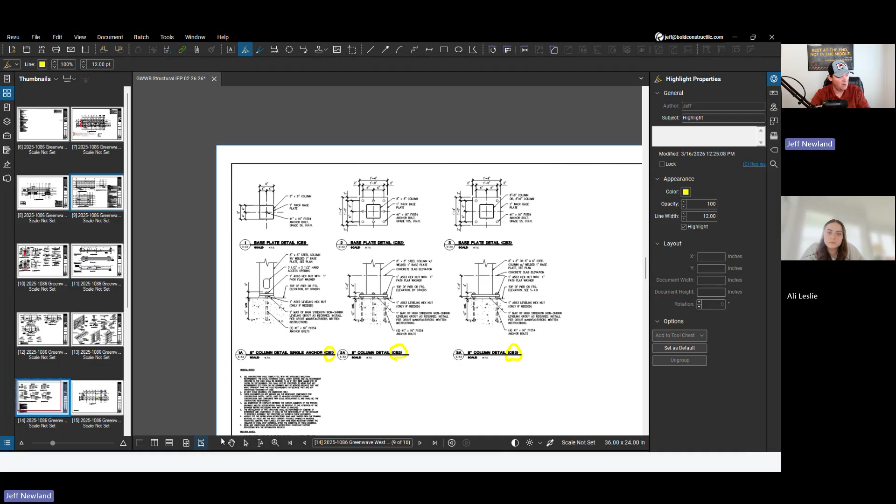Let's see, cold joints approved. So cold joints we talked about, right? That's anytime that your plans don't specifically call out where a cold joint is, or whether it's a cold joint or a monolithic pour, you'll need to pay attention to that. There we go. I do want to show one example. Let me make sure we stay on time here. We're still good. The most obvious example I can give you of a cold joint is going to be on our trench.

See here, here we go. All right, so all of this is drawn to be monolithic. There's no joints in any of this that I see. But that's not the way we do it. There's no way to pour this trench and get it right if you do it all monolithically. So what happens is we have a joint here. So they would pour this bottom first. Then typically they'll form this up and they will pour this second right here.

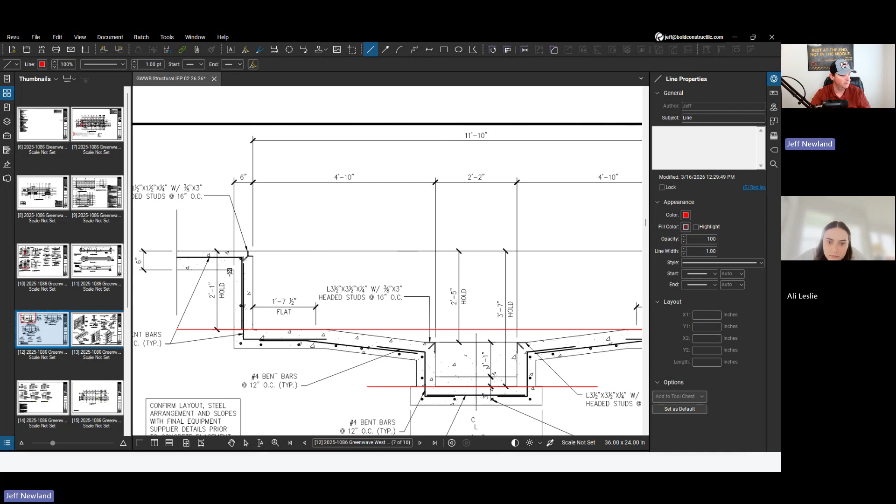And then most of the time, they'll pour that. All right. So for a trench, you have 1 pour, 2 pours, 3 pours, and then a 4th pour for your slab on grade. Okay. Now, those are all cold joints. Every one of those is a cold joint.

That's where most concrete subcontractors miss this note right here. Where trench wall and slab are not poured monolithically, install a PVC water stop in keyway. Keyways, we don't do a ton of, so just make a note. You can Google, find a video on what a keyway is.

But essentially a keyway is meant to keep 2 pieces of concrete, like concrete's going to move, right? So it helps to keep it from, if it's going to crack, it controls the cracking, and concrete's going to crack. There's 2 things concrete does: it gets hard and it cracks. That's it. But so they need to have water stop. That's the important thing with this note. Install PVC water stop in a keyway. So water stop would be installed here, here, and here.

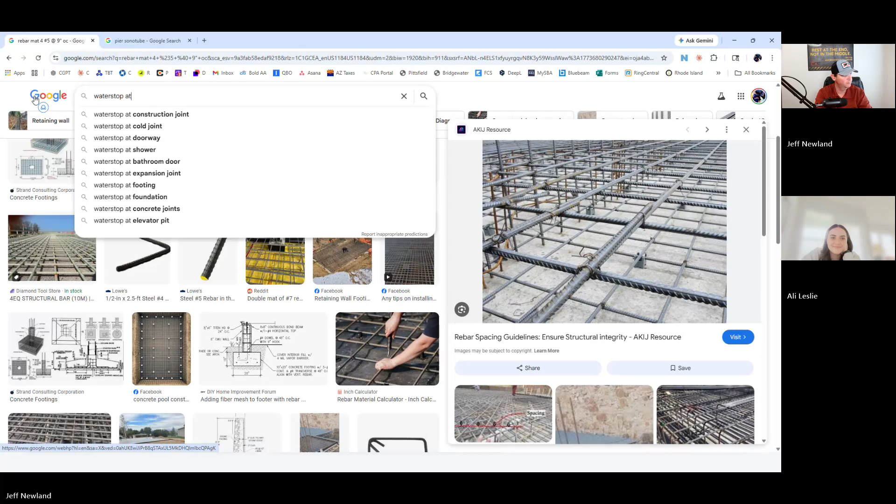Okay. When we first started doing car washes, I had to Google what a water stop was because I had no idea. There's a couple of different types of water stop. So like we did this in the Northeast. They actually put down caulking and then they put down a piece of tape. It's like a foam tape. What happens is when this tape gets wet, it expands. And so the first time it gets wet, it blows up on you.

This is a traditional water stop right here. So basically it keeps water from moving from this portion of the slab out into the earth. That's what it does. It literally stops the water.

You know, a lot of our acronyms are pretty easy that we came up with, or a lot of our terminology. Yeah. Right? Yeah. For a second there, I was embarrassed. I didn't know it. I think it was before our first meeting, it was stormwater. Mhm. And I was like, well, is stormwater just water that comes from the storm? It was a whole thing. And I was like, okay, that's embarrassing. But then there's some things like when you were saying the rebar ties, it's actually a tie. Right. Yeah. We get real technical here. Like I said, we're not building watches, right? We don't need to overthink it.

Yeah. And it's a lot of moving. It's a lot of simple stuff, but when you put all this simple stuff together, that's what makes it complicated, at least from the outside looking in. It looks like, oh my God, that slab just looks incredibly difficult. But when you actually break it down and look at the details, it's not as complicated as what it seems on the surface.

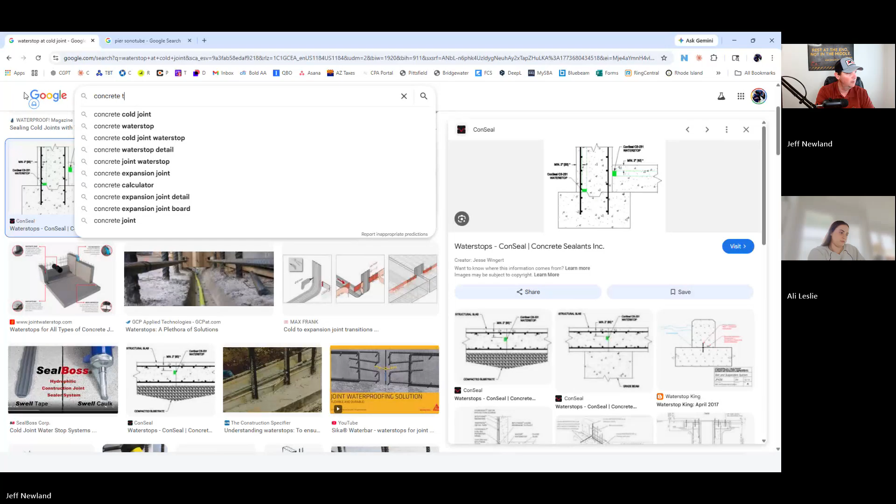Okay. So then your concrete is typically going to be broken at 7 days, 14 days, 28 days, and maybe even 56 days. So you've got to have that many samples, right? If you're breaking one at 7, one at 14, one at 28, and one at 56, that's typically 4 samples that you'll need.

Something to keep in mind is that concrete will gain about 80% of its strength in the first 7 days. So if you've got a break at 3,500 PSI and it breaks at like 3,200 your first 7 days, you're golden. But if you get a report back and that 7-day break is 1,200 PSI and it's supposed to be 3,500 PSI at the end, then it could be a bad cylinder or it could have been a bad concrete batch.

So then we can make a choice now. Okay, we're going to take that 56-day break and go ahead and break it now. Let's break that other one and see what it is. And maybe it turns out to be 3,000 PSI and you're like, okay, it was just a bad cylinder. Or if it breaks the same, then you're like, okay, we've got a problem. We need to figure out what we're going to do.

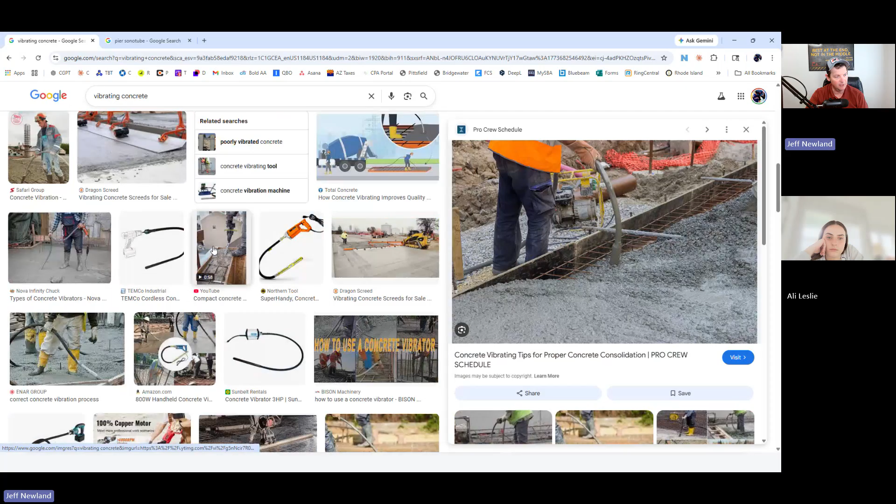One way to obviously tell after it's done, and I would encourage you to look up, I didn't send videos on concrete vibrating. I should have, because it's very important. If you look at the edge of a slab, you can tell that it wasn't vibrated properly because it honeycombed.

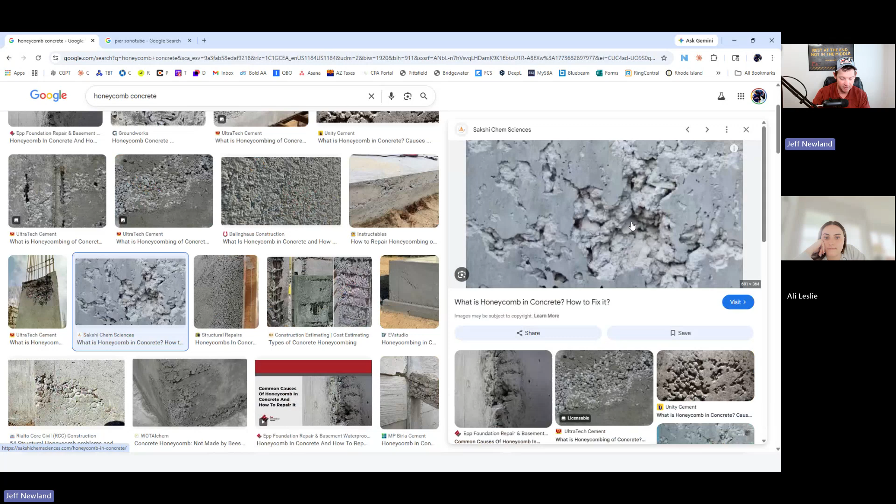That's called honeycombing. So that is a clear indication that concrete was not vibrated right. The cement did not mix with the aggregate correctly. And you'll see this a lot on curbs, on the back of curbs, because you're not going to vibrate the back of a curb. It's not as critical.

Where you don't want to see this is a good example. That was clearly not vibrated. That's a problem. Ooh. Yeah. So that's why it's very, very important. Now, this happens to be probably like a bridge column or something like that, where they actually had it formed.

But that's why in Texas, you have to physically make sure that they vibrate it, Texas or wherever you're earth forming, because once they pour that footing, you're not going to be able to see the edge of that concrete. So that's why the superintendent has to make sure that they're vibrating the concrete.

So then what would you do if that happened in that case? In this case, you would do an RFI, send a photo, ask the structural engineer, and the structural engineer is probably going to tell you to tear it down. Most likely. So that's a pretty rough example right there. That's pretty bad. I would say that's an extreme example.

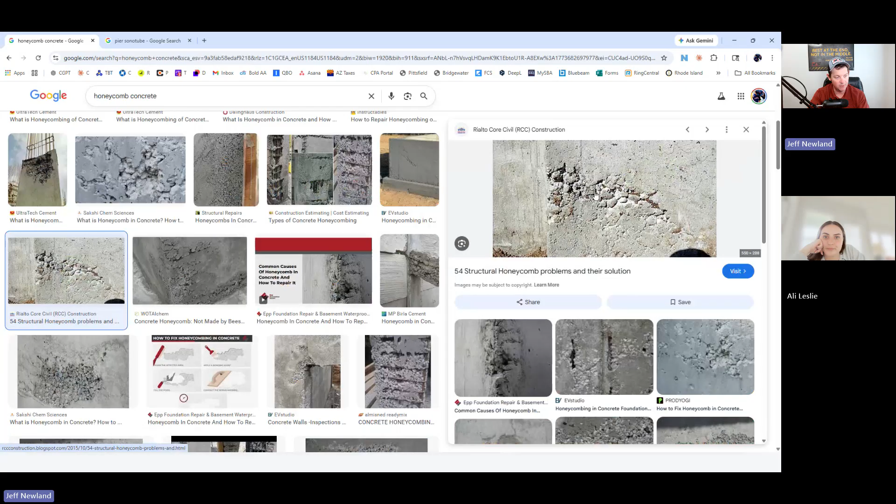You'll see a lot of this on some of our edges, some of our corners of our slab. You'll see this from time to time. Okay. Typically, if it's just a little bit, probably not going to be that big of a deal, right? You're never going to get it completely smooth like this. I wouldn't worry about this too much. But you don't want it any worse than that. Okay.

Yeah, that's just awful right there. Whew. It's terrible. But anyway, vibrating is super, super important.

Weather watch. So if it's hot, that's why they make fun of us in the Northeast, because on one of my first projects up there, and actually Ron talked about it as well when we were in Pittsfield, the concrete guy was getting ready to make his first pour, and they said, we're planning on pouring about 2:00. And he said, is that in the morning or in the afternoon? And he was like, are you kidding me? We pour in the afternoon. And he's like, well, in Texas, sometimes we pour at 2 a.m. because it gets so hot here so early.

And the hotter it is, the quicker that concrete's going to set up on you, and then you won't have a chance to finish it correctly. So, okay. I think some of the car washes we've had to do, maybe not 2 a.m., but definitely early morning pours. So that makes sense. Yep.

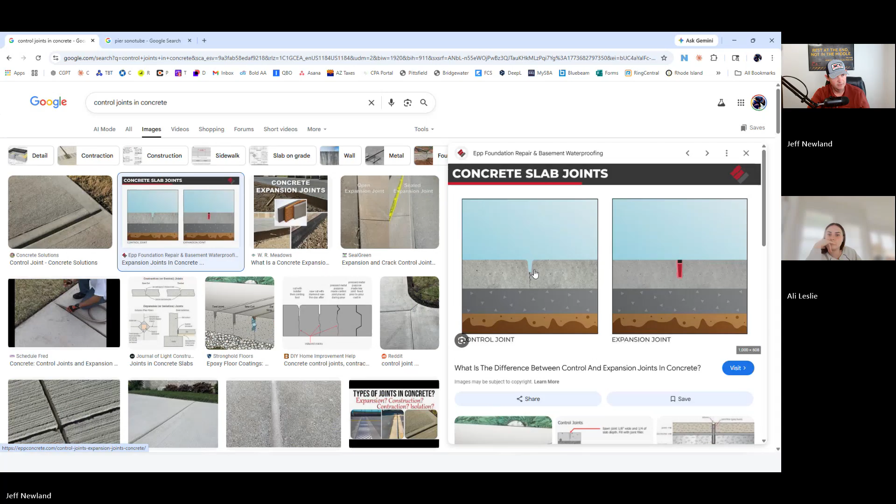So control joints are just the little saw cut that's made, like right here. That's a control joint. An expansion joint is typically where you have two slabs meet. So it's a cold joint, right? But it's made for expansion.

So you'll see them put little pieces of plastic. I hate the plastic ones, but sometimes they use plastic. Other times they use like an OSB type board that they'll put in between the two pieces of concrete. That way, that concrete's going to move like this, and that expansion joint kind of helps keep it from cracking and busting up. Okay. But the saw cut is what's done.

Let me snooze that real quick.

But a saw cut is for a control joint, and like I said, controlling the cracking is exactly what that's for. It'll typically crack from control joint to control joint, or it won't necessarily crack at all. Okay. But concrete always cracks.

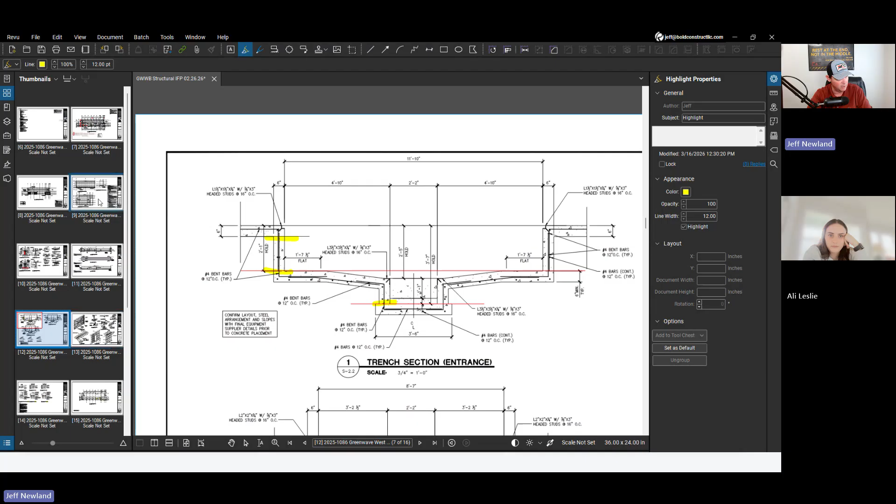So, floor flatness, levelness. We've got to make sure that our elevations are correct, depending on the slopes. That's super, super important on our car washes, because right here they've got these elevations. I can look at this and tell you that this is telling me that elevation right there, and this is telling me this elevation right here in the corner. So I know that this slab is sloping that direction.

So it slopes all the way to there. And then we're sloping from this direction, we're going to slope this way. Okay, or we should, anyway. All right. And obviously this is all at elevation 100, except for, which you'll find a note: if floor drain is desired, slightly slope concrete to drain, coordinate quantity and final location with owner. That's basically one big cop out.

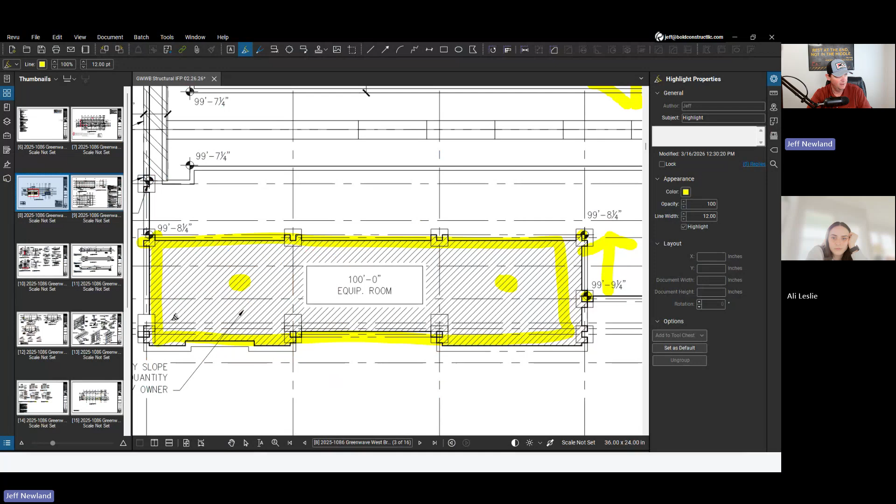But we know that in our equipment rooms, we typically have a drain here and a drain here. So we're going to be at 100 on the exterior of this, and then we're going to slope to the drain. So this would actually be sloping this way. Probably we're going to slope it that way for this one, and then come in here like that, so it all slopes to the drain. Not a super slope, maybe like 2%, actually probably like 1%. Just a gentle slope to the drain itself.

Okay. What you will run into, like we've had on the car washes, is if this is our drain, they only slope it in an area about like this, and then all of this ends up being 100. So if we have a spill over here, it never makes it to the drain. That's why it's got to be a steady slope all the way from the corners. Okay.

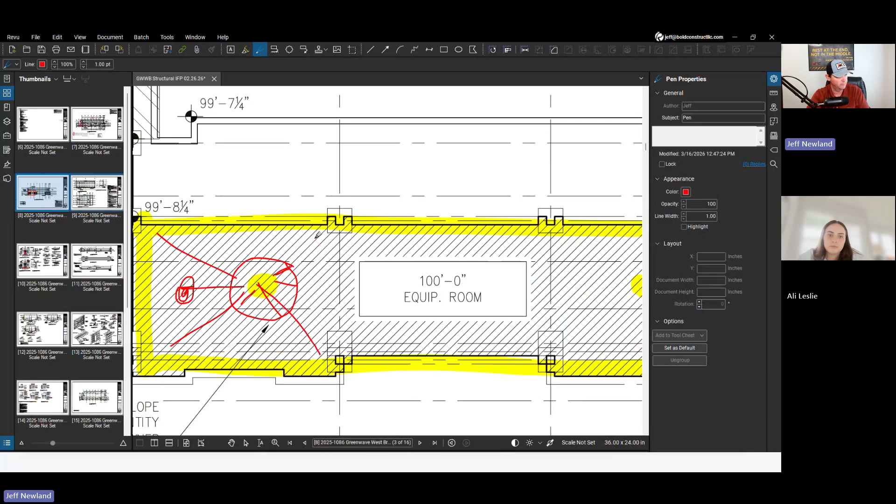7-day breaks, we just talked about that. It's 75%; I think I said 80%. So you should have 75% of your total break. If it was 4,000 PSI, then you should be breaking 4,000 times 0.75, so at least 3,000 after 7 days. And then 28-day breaks, that's the official breaking. You should obviously be at 100% or more by that 28-day break.

All right. Goodness. Are you cool with going over today? You got anything to do? No, I'm good. Okay. I have not done a real good job of keeping track of our time, and we are way off. So, all right, let's just keep going.

All right. So talking about anchor bolt layout, which we've already talked about at least a little bit. Most of the time on projects, your anchor bolts are going to come with your steel. Whoever's fabricating your steel columns will fabricate your anchor bolts as a general rule of thumb. Here's why that's important. Say Modern Wash is a great example, not Modern Wash, the metal building manufacturer.

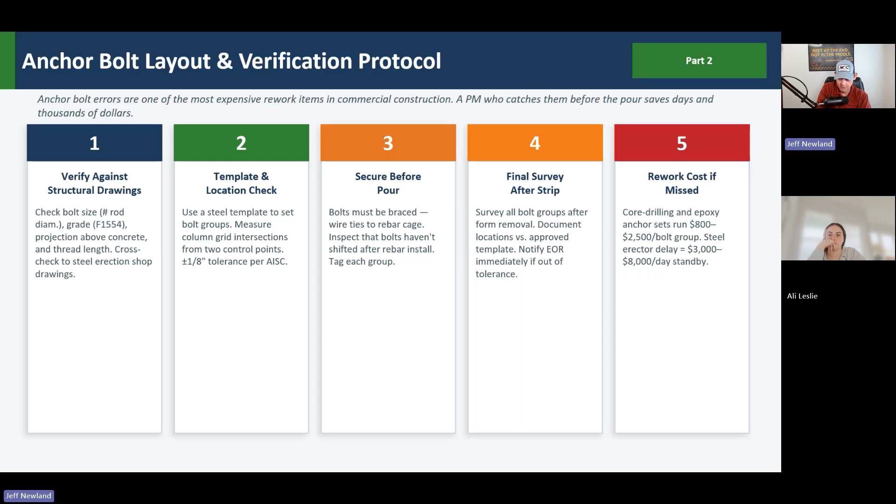The way that we do these, if the process is followed that we set in place, you will never have to. Never is a strong word. Most of the time you won't have to core drill and epoxy or drill and epoxy any anchors, because we've surveyed the base plate and they're all in the right place. We would rather that the steel be wrong when it comes in, because it becomes a monetary issue, right? Then somebody else is paying for it besides us.

All right. So concrete ticket verification. Oh, this is kind of in the wrong order. We should have talked about this when we were talking about concrete tickets. Well, I'll rearrange this PowerPoint, but it's all the same stuff that we've talked about. You should have a mix design number on your concrete ticket. You should have a PSI. This is basically all the stuff that the superintendent should be checking. Do a check on the first couple of trucks, and then do a spot check thereafter.

Concrete testing. We have talked about this pretty extensively, talking about slumps. Is there anything you don't understand about slump or when they take their test cylinders? No, it makes sense. The only thing is the 7-day break and 28-day break, I'm understanding it for the retesting, but maybe I'm thinking too far into it because we would just send that off, right? Well, it's always sent off, though. Yes, the testing lab is the one that does it. They're in their laboratory and they test it. So you're not really sending it off.

Unless you're talking about when you get the report back, then you're sending that off. Which one are you talking about? No, I think I'm making it a little bit more complicated in my head of just the break part of it, but we will have already poured. So that's when you have the cylinders, you have your 4 cylinders, but your concrete is already poured. Oh yeah. Yeah.

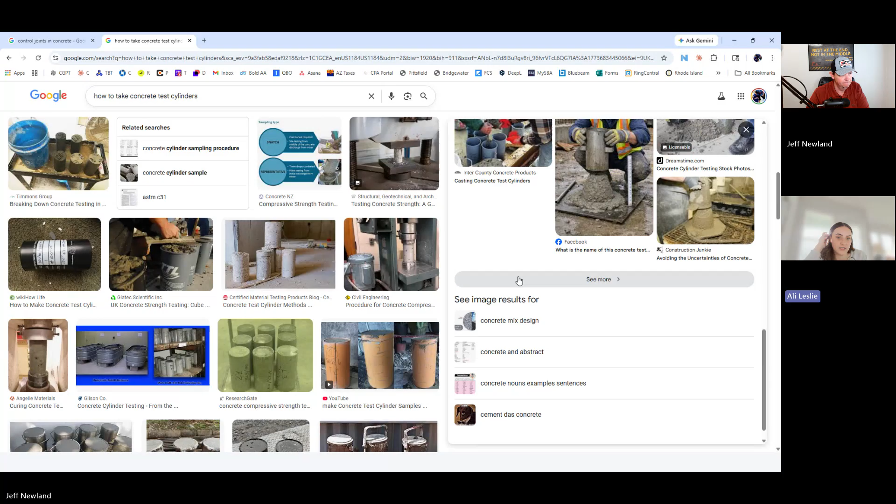Okay. But they're doing the cylinders and you just keep on pouring. You just do your thing. You don't let the testing stop you. Nope, you keep going, you don't wait for the results. You got it. That's why after the fact, if you have a bad break, that's where we end up going back. The report they'll give you along with the test break will tell you what it broke at, but also where that sample was taken from, like which portion of the slab. And then we may have to go in and core that portion of the slab.

When we core the slab for testing purposes, you end up with a concrete cylinder, and they do the very same thing. They take it back to their lab and crush it just like this. They'll put it in a press, it gets crushed, and when it actually breaks, that's when the machine stops and it tells you what the PSI was. Okay, so it actually does break. Yes, it gets broken, just like this. Yep, that's more slump test, but yes, that is absolutely right.

Okay. Let's see, air content. Again, that's going to be part of your mix design. Concrete temperature, that's the temperature of the actual concrete. Then you've got hot weather, cold weather. So anytime it's less than 40 degrees, we have to do extra measures. Sometimes concrete needs to be covered in order to maintain the moisture in the slab, because it may dry out too quickly or freeze. You've got water in the concrete, right? And if that water freezes in the concrete, it'll do what's called spalling on top. Let's see.

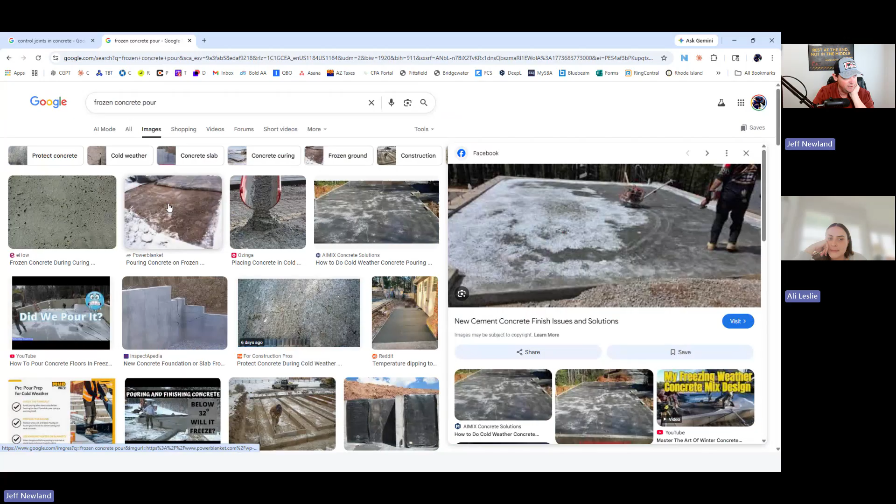Let me see if I can give an example. Yeah, so that's a pretty good example of what happens when you pour and you don't keep the concrete covered and it doesn't maintain the moisture. It turns out to be an awful, awful finish, and it also affects the structural integrity.

So that's where when we get into it, like this particular one, they put down blankets after it was, I'm assuming this is after it's poured. It could be before it's poured. I can't really tell from the photo. And they're just trying to keep the ground thawed.

But here's another good example of what happens when it's too cold and we didn't leave it covered, for whatever reason. This is them. So you can see the hot concrete. They're covering it so that it can cure properly. Okay. So I guess with that, if it is still wet, it's okay to lay something on top of it.

Yeah, so it's not like wet. So like you could walk on this probably. And it might leave just a little indention on your footprint. Like you're not going to sink. It's that cured. It'll be like when it's as cured as it is when you have, so when a guy goes to,

Well, because I know we did this in Missoula and Billings. We had to pay for winter conditions, and I remember the concrete company would come out every night during that time and cover it, and then the next morning reheat it. They would do all of that. Yeah, so they were keeping the subgrade thawed.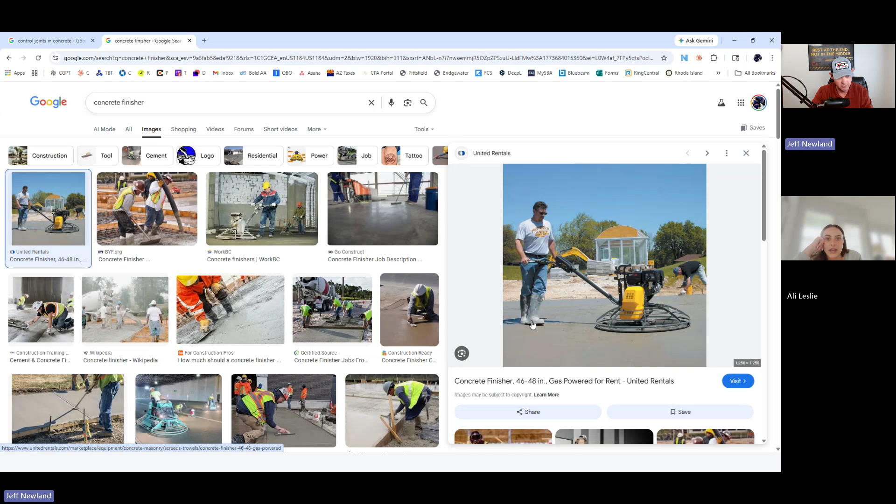So it's just literally that top 1/8 inch maybe of the concrete that you're actually finishing to give it a nice smooth finish, or a rough finish; it all depends on what kind of finish you're trying to achieve. And they also make them to where they're ride-on. So these are like ride-on machines here. So, but yes.

But like in Missoula or Billings, we would actually have little 2 inch lines. Think about them like garden hoses, except they're 2 inches in diameter. And they would have glycol run through them, which would actually keep the area heated. And we'd throw a blanket over it, and it would keep that subgrade heated, because you don't want a frozen subgrade to interact with your concrete as well.

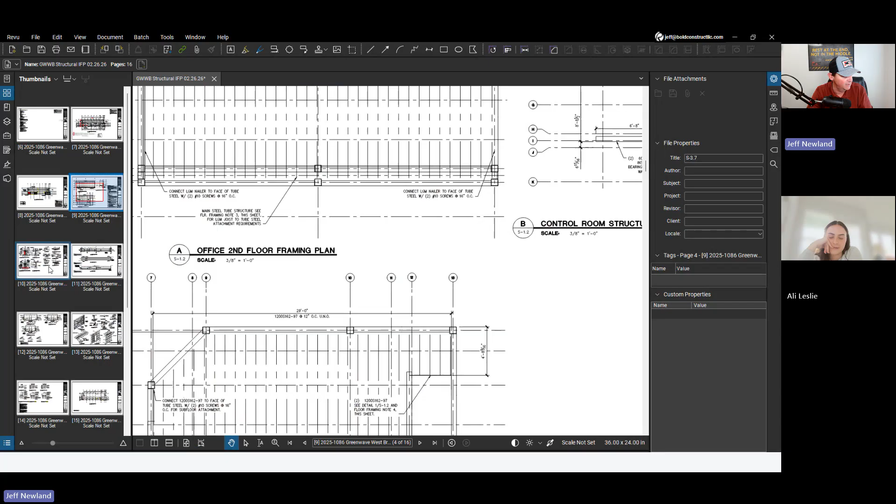Something else to keep in mind is this amount of room that's left from the top of the bolt to the top of the base plate. That'll often be specified in your drawings, because that's some place that we got in trouble in San Antonio as well. So it's going to be on your base plate details. And we can see right here, the distance we're talking about is from here to here. They call it out to be 4 inches.

Very important because they want to put a leveling nut underneath their base plate. Then you've got the base plate, then you've got a nut on top, and you've got to have some thread exposed at the nut. So in San Antonio, these only ranged anywhere between 2.5 inches to 3 inches. Okay.

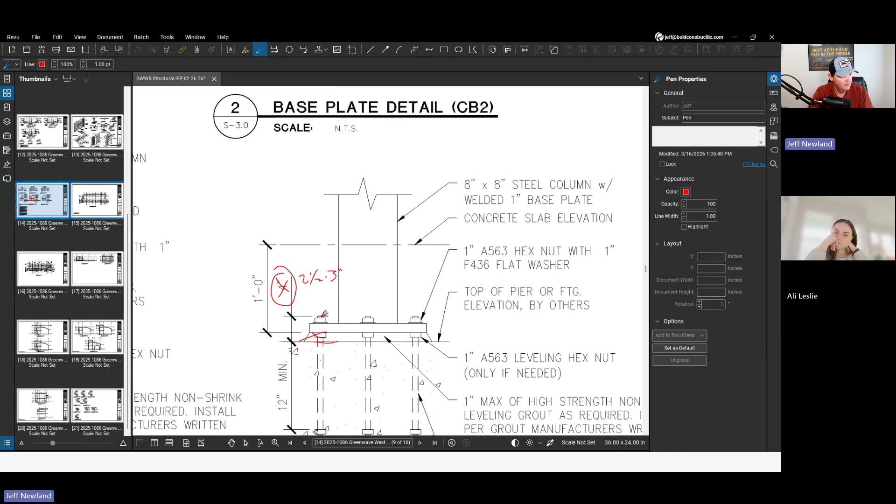That's a problem because what happens is even if you do away with this bottom nut, you've got a base plate. So if you've got the top of the footing right here and you've got an anchor bolt that's through here, I'm going to draw this to exaggerate, and say this is only 3 inches. Well, now all of a sudden your base plate is 2 inches thick. So your base plate's there and now your nut is here. So you're only able to get this many threads on that nut. Huge problem. It's not going to be secured.

So even if everything had worked out in San Antonio, Sal was still going to end up tearing that stuff out because these J bolts were not up enough, right? And that's as much on our superintendent that was on the job at the time as it is the concrete guy, because that's something that is so easy to measure, right? They've got this in place. So right here is a perfect example.

All you got to do is measure from the top of that base plate to the top of that nut. That's it. And take into account your base plate thickness, right? Because the concrete's going to be poured to the bottom of this base plate template. So add that and you should be at least at that 4 inches. Okay. So you end up with this right here.

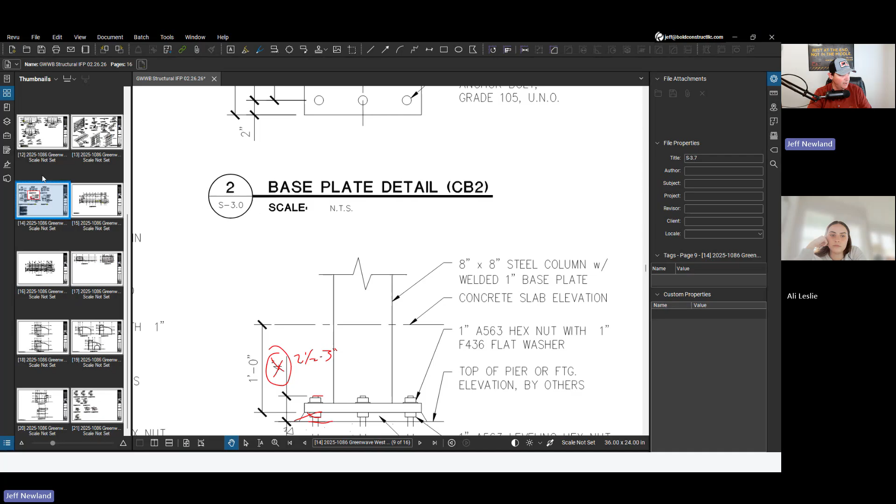Maybe the concrete contractor comes to you and says, you know what, we don't want to do that, we're not going to pour it like that. And we're not going to dictate to them how it gets poured, because that's means and methods, right? So we can only give advice on how we think it should be poured. But maybe the concrete guy says, no, we're going to pour this all at the same time.

How are you going to make sure that this wall is poured correctly and that this slope is all correct? Because don't forget, we have some hold dimensions here that we absolutely have to hold and maintain. That 4'10", that 2'2", all of these are critical dimensions. So how are you going to do that?

Sometimes during that conversation they explain it to you. Okay, no big deal, they're taking the risk for it. Other times they may change their mind and say, you know what, you may be right. We may just put a cold joint here, because it's going to be very difficult for us to maintain these dimensions up here when we're trying to pour all of this.

And then if you were to have that conversation with the concrete contractor, would you then have it documented? Like, you are going to be doing this, sign here if it doesn't go that way? Not really a sign here. It's more sending them an email, or it's in your pre-install notes from the pre-install meeting.

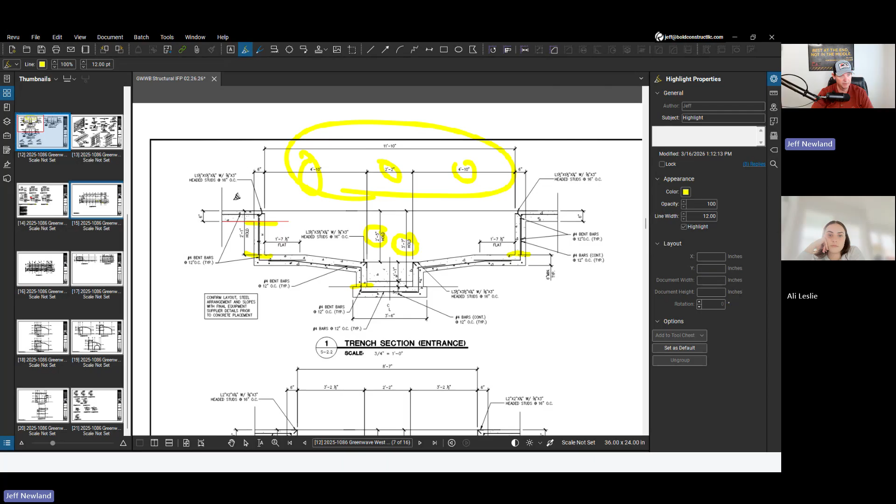It's not just a verbal conversation, it's documented in the notes. That's distributed to everybody after the meeting, so they know exactly what was discussed. You always document everything. That's how we get in trouble, with verbal conversations. Whether you're talking to a sub, an owner, or an engineer that makes a site visit, document everything.

Control joints cut too late or at the wrong depth. That can be a big problem. It's not always going to be a drawing that shows you the control joint. Sometimes it's just a note that says we need 1/2-inch control joints within 24 hours. Let's look here real quick. A lot of your notes, like for concrete: your PSI for slab on grade, foundation wall, footings.

It's not in the footing schedule, it's right here in the notes that tells you what your PSI should be. It also gives you your laps. If you've got number 8 bars, you have to have lap splices of 4 foot. That's a big lap. What are we looking for here? I forgot. Oh, control joints, saw cuts.

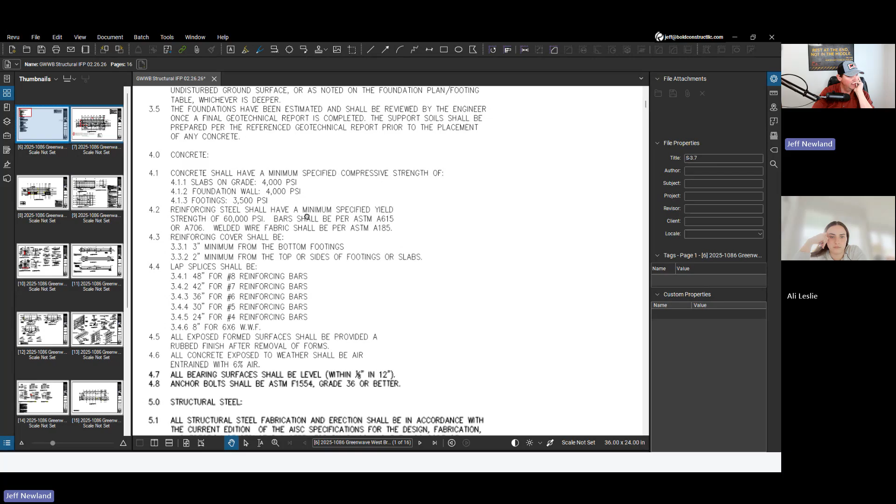These are all the laps they talked about. That's talking about the air, all related to your mix designs. I don't see any notes here. So I'm going to search the word saw cut, and I don't see any. Then let's do control. No notes there either that I can tell, assuming the file is actually searchable.

That's why it's very important to read all the notes, especially for a superintendent. Like I said, that water stop note is nowhere else other than that one little note. It's not called out in the details. Would it be easier if it were called out in the details? Well, hell yeah, but it's not.

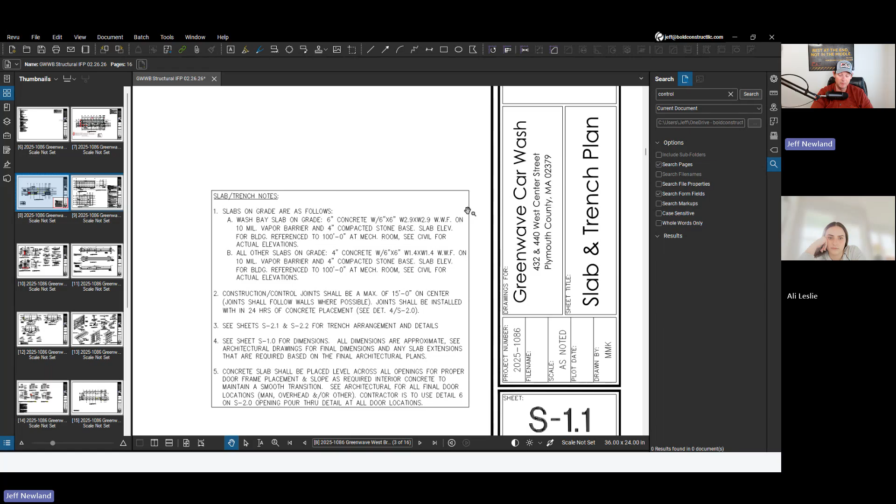See, this tells you also, so the wash bay slab on grade is 6 inches of concrete with the welded wire on a 10 mil vapor barrier. So if a contractor wants to deviate from this, say they want to do rebar instead of welded wire, that's where we have to ask the question, just to make sure. Because they specifically say they want welded wire. So if somebody wants to use rebar, it's probably fine. We just need to ask the question.

And they may want to use rebar. So if they want to use rebar, it could be because they have it left over from a previous job. It could be that they have it from whatever. So there's usually a cost related reason.

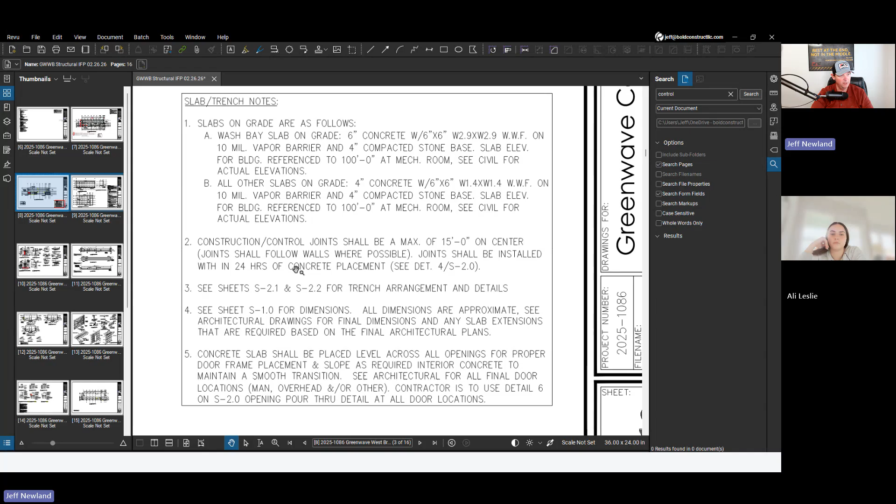Here's our control joint. Our document is not searchable, unfortunately, because it should have pulled up control. But construction control joints shall be a max of 15 foot on center. Joints shall follow walls where possible. Joints shall be installed within 24 hours of concrete placement. And it actually gives you a detail 4 on S2.0. So let's go to page 2.0, detail 4, which is going to be right

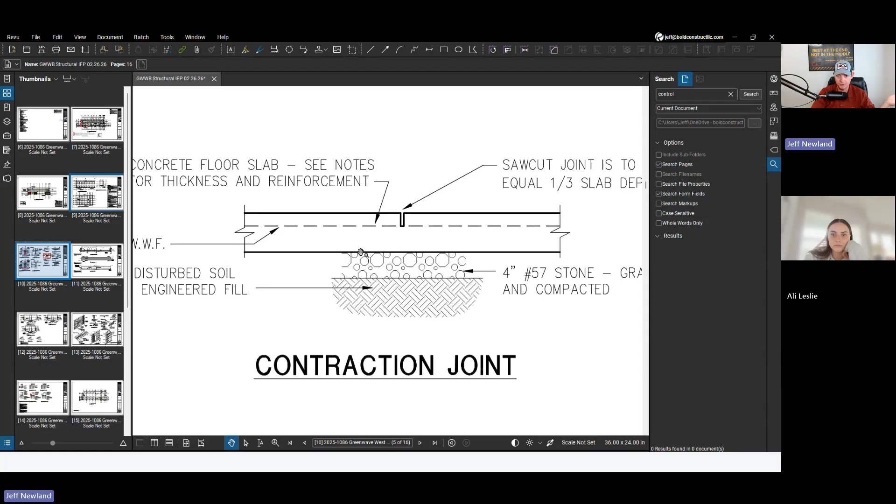Now, the control joint, this is where you're saw cutting. You're just running that saw, and obviously you want to keep it above your wire, right? Another critical thing, this is why you want your wire at least far enough down to where you're not hitting it with the saw whenever you saw cut. And I believe it said every 15 foot, right?

And then honeycombing. We talked about honeycombing. So patching, removal. You can always patch a honeycomb, but if it's something really bad, it's not gonna help. We see it most often on light pole bases because they don't take the time to vibrate it correctly when they pour the light pole base. Now that you say that, I've seen that during punch list. Yes. And so we'll talk about them maybe having to do a skim coat.

That's where they take some cement and basically wipe down the column with it, or the base or whatever they're doing, edge of the slab. If it's exposed concrete and you've got the edge of the slab, it just looks awful. We'll have them go in there and rub it. We'll do the same thing on the trench wall; sometimes that'll end up honeycombed a little bit. We make them go in there and rub it, make it smooth, make sure there's no voids.

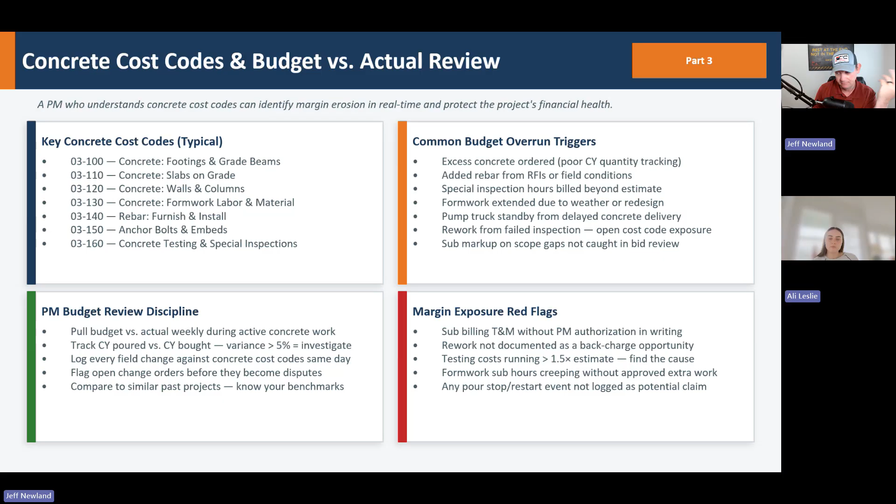All this is kind of standard stuff. Again, the rule of thumb, a subcontractor should not proceed with changes until they're approved. You live by that, and it eliminates a lot of surprises. So, let's see. These are just some more questions that you can go through and look at, if you want to do a little bit of homework on it.

I don't really see any given a sample delivery ticket. You're not going to see delivery tickets unless you're on site the day of the pour. So that's not a really big deal. But the delivery ticket, you would want your super to include that in their daily log. Yeah, it really should be.

So a lot of times what they'll do is when they deliver the concrete, the ready mix folks will have one place where they put all the tickets. So a concrete truck comes in, he's got a ticket, and he puts it, say, on the pump truck. That's actually where they stage a lot of them, because the pump truck stays there, right? So they'll typically have a big magnet or a clipboard that's attached to the pump truck.

And then when this ready mix supplier comes in, he dumps that concrete into the pump truck. He takes the ticket and puts it on the board. And then at the end of the pour, the superintendent should have a stack of tickets.

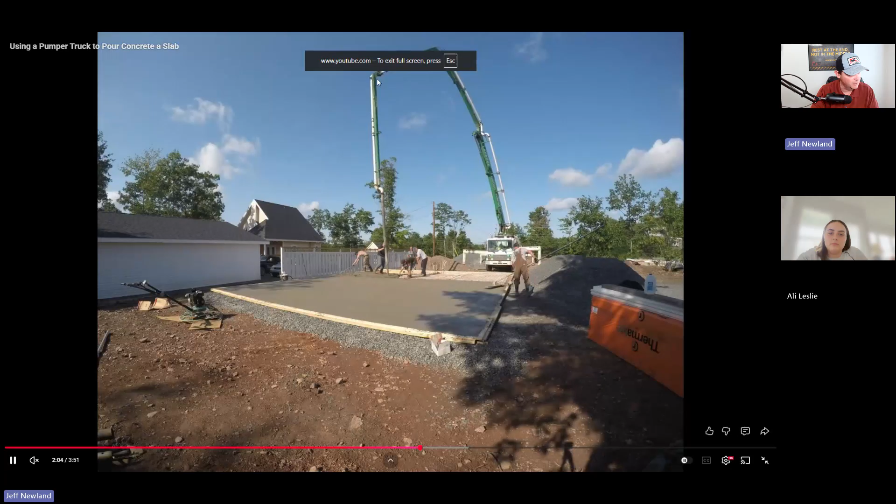So with that situation, would you then start enforcing, or is it already enforced by OSHA to have hard hats on? Yeah, it's enforced. We should have hard hats on anytime you're on a job site. That's part of your PPE. Okay. And he did just have one on.

Guys don't like to wear them a lot of times because it's hot and they fall off and this, that, and the other thing. But it's absolutely a requirement. You need to have them all the time, but especially if there's any work going on overhead, absolutely always wear one. 100%. And we like to wear one as well because we set the standard, right? If the PM comes on site and the PM's not wearing a hard hat, well then why the hell do I have to wear a hard hat? Stuff like that.

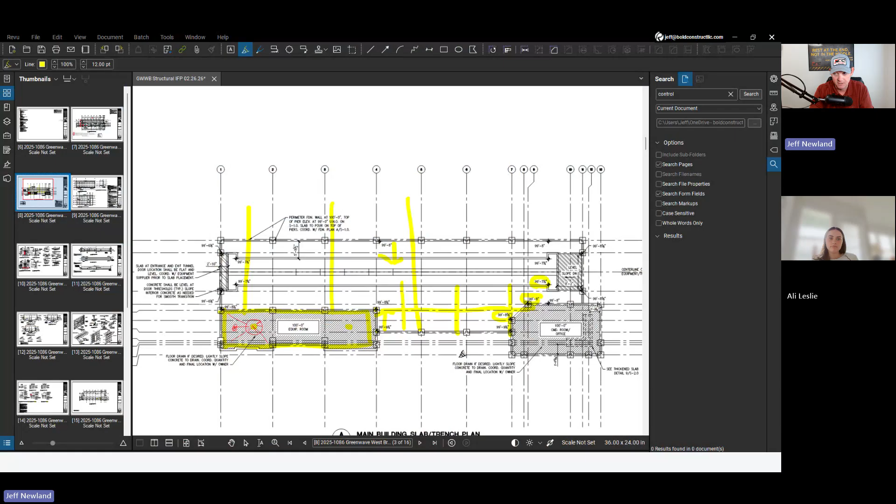And more importantly, especially for something like this, and again, you'll learn this in your OSHA course, he really should have like a respirator on. That way it filters out the air. And again, people don't like to wear them because they're uncomfortable. And the other thing with silica is you don't see the effect right then.

But after a concrete guy, if he's a saw cutter and he saw cuts all the time, so he does this for 5 years and he's breathing that in all the time, it's not good. He'll get sick. So anyway, let's go back to here. All right, cool.

That's all I got. You got any questions or anything that didn't make sense? No, not really. I think there were things that maybe I was confused about, but you answered it. I don't think I ever really truly understood that the slab and the foundation were two different things. I would have always just tied those together. The photos help.